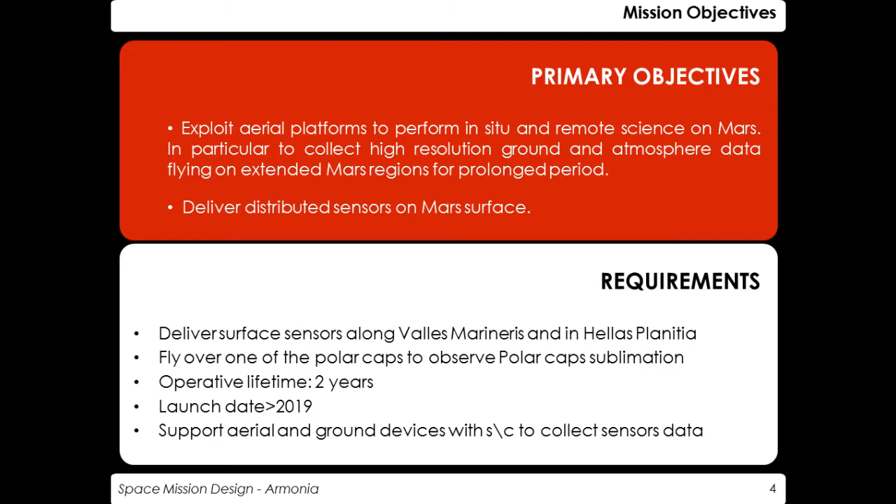Looking more in detail at the phenomena we are going to observe, we have divided them into two major regions. First, in the tropical region, we would like to observe the genesis of local dust storms, dust devils, and other phenomena like the sources of methane.

In the polar region, we would like to observe for sure the polar cap sublimation, and again the source of methane. In addition, we would like to remotely observe the residual magnetic field of Mars.

Our mission is mainly based on the use of 3 superpressure balloons as aerial segments. This is our choice: we decided to deliver 2 in the tropical region and 1 on the polar cap. This allows us to reach the 2-year operational lifetime, since the lifetime of a single balloon is not sufficient to cover the whole mission.

This is not done continuously, but at least they will cover the most relevant, scientifically significant periods on Mars. We will also rely on a dedicated entry vehicle, one for each balloon.

Thus, we can inflate the balloons directly in flight. This is the most promising technique for inflating balloons, and it will also allow us a sort of flexibility in the regional deployment of our balloons, and also in the time deployment of our balloons.

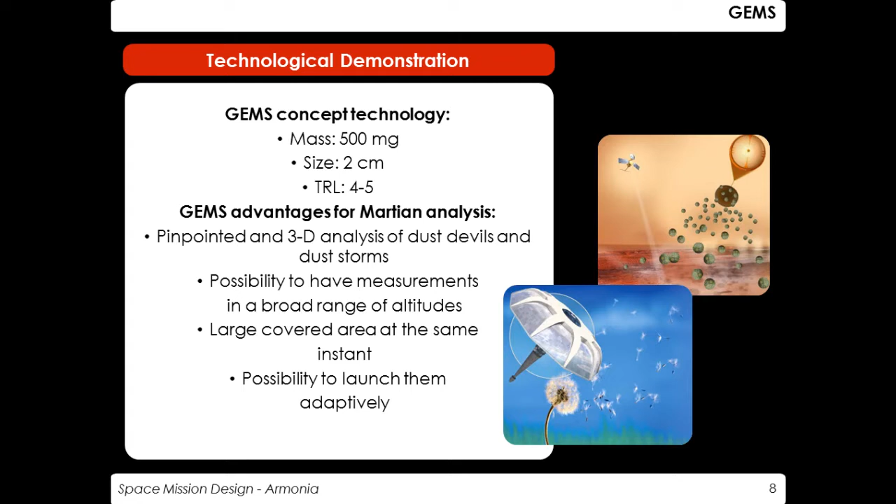They can be released by balloons in a peculiar period or during some relevant events. There are also representative models of the sensor.

Looking at the time scale of our mission, we will mainly have 3 phases. After the launch, we will have the transfer from Earth to Mars. Then we will have an aerobrake of about 150 days to save propellant and make the mission feasible. And then we will have the 2 years of operational lifetime ending with the disposal.

Having a look more in detail at the operational lifetime, we will first have a 1 month setup, during which we will observe Mars and try to set up everything, and maybe reschedule something or adapt the mission.

Then we will have the 18 months measurement campaign, during which the 3 balloons will be released according to what we have decided.

Finally, we will also have a buffer slot of 5 months for further measurements, or if the balloons survive longer than expected, we can keep collecting data, also from the ground station. We could also rely on releasing balloons in common periods to try to have simultaneous measurements.

What we selected was an aerobraking maneuver. We chose that because it's flight proven twice at Mars, it doesn't impact the interplanetary transfer too much, and it doesn't have strong requirements on the spacecraft configuration, but leads to large delta V savings.

We used a simplified model for the simulation, neglecting Mars rotation and assuming an exponential atmosphere model, and selected some parameters. The initial orbit is similar to the MRO mission, with the apocenter just inside the sphere of influence of Mars and the pericenter equal to the operational orbit we selected. During the aerobraking regime, we will have a pericenter of about 100 kilometers, chosen to minimize duration and have acceptable thermal and structural loads.

This is the result we get: a delta V saving of 1.2 kilometers per second, leading to a huge mass reduction. The possible issues were analyzed and solved, since almost 5 months to reach the operational orbit are okay within the mission timeline, and the thermal and structural loads were analyzed and found acceptable.

Here you can see the initial orbit in blue, and then every 50 orbits represented, as you can see the apocenter is decreasing until reaching the operational orbit, shown in green.

So we maximize for the communication windows, and these are the results we get using simple formulas and numerical simulation, assuming a minimum elevation angle for the communication of 10 degrees. We got a minimum communication window of 7.1 minutes per Martian day, and we have 100% coverage of the Mars surface in one day, so no blind spot for the aerial and ground segments.

This is just an example for one orbital period of coverage. For the entry vehicles, we selected a procedure to release them: we acquire a release orbit slightly lower than the operational orbit, we release the entry vehicle and related structure, as will be explained later, and then we return to the operational orbit.

For the trajectory of the entry vehicles themselves, our driver was again delta V minimization. We used a model for the orbital phase and the first order Allen model for the atmospheric phase. We had constraints on the velocity at which the supersonic parachute is released, and on the flight path angle, in order to minimize delta V and keep the entry vehicle inside the atmosphere. This is the parameter we selected, again through trade-off.

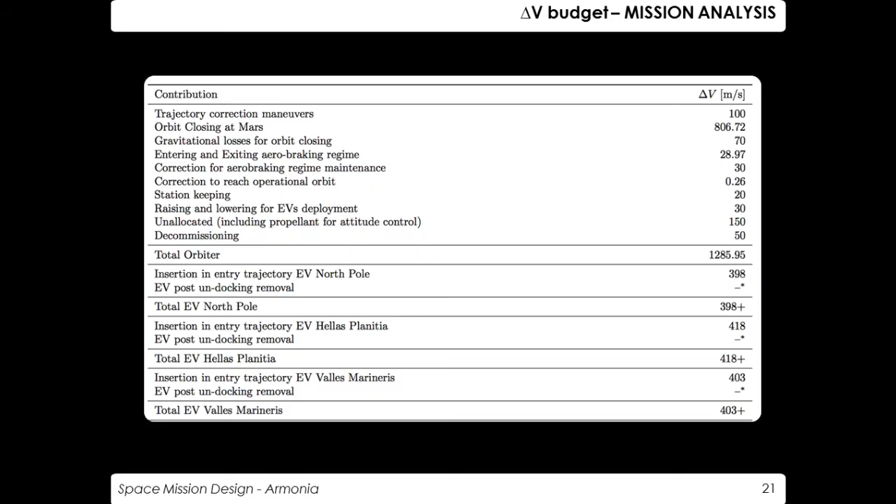I will now leave the stage to Claudio Pulsi, who will tell you all about the balloon design.

Thank you. I will try to explain the process that brought us to the design of the balloons that support the aerial platforms. First, an analysis phase during which we studied the environment of Mars, selected the technology for the balloons, and asked ourselves whether we wanted to rely on a guidance, navigation and control system on the platforms, and finally the strategy for the buoyancy of the balloon.

Then a sizing phase, during which we decided the dimensions of the balloons and chose the material for the envelope, and finally produced two numerical models as validation of our design: a thermodynamic model and a flight dynamic model.

First, for the environment, we used the Mars Climate Database from ESA as a tool. It receives as inputs space and time coordinates on the surface of Mars, and gives as outputs the main properties of the atmosphere, such as density, pressure, and so on.

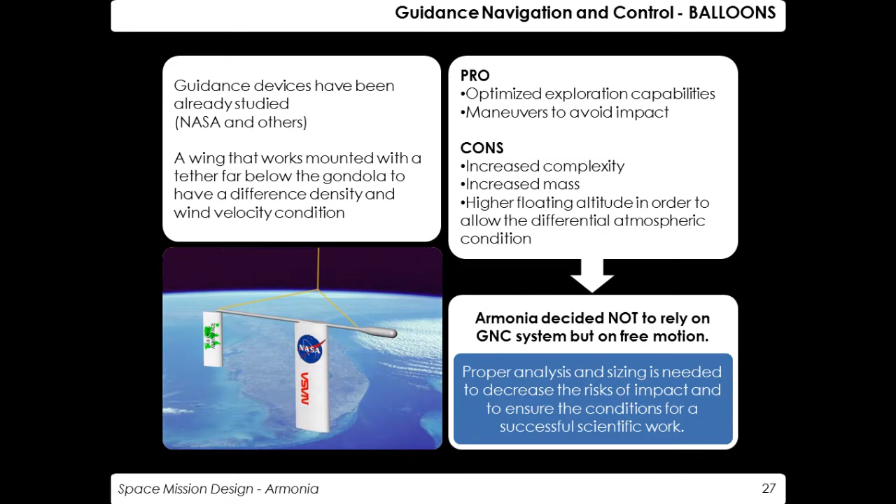As I said, the superpressure balloon flies at a constant density level, so we had to choose the density through some criteria. We created a model of isodensity surfaces in the atmosphere of Mars, and marked them with two performance indexes: the altitude experienced by the balloon, which has to be as low as possible to perform good quality measurements, but not too low in order to avoid impact on obstacles. So these are the two performance indexes.

For what concerns the balloon sizing, we followed static dimensioning through the Archimedes principle and exploited the two concepts on which superpressure balloon technology is based: superheat and superpressure. Superheat is the delta temperature across the envelope of the balloon, which must stay within assumed values, and superpressure is the delta pressure across the envelope, which must always be greater than zero. With those as inputs, we came out with the actual sizing dimension of the balloon.

For what concerns the material, we chose to rely on a composite envelope material in order to match all the requirements such as strength, stiffness, and in particular permeability of helium, because we wanted to increase the lifetime of the balloon, and UV resistance, which is a major concern in the atmosphere of Mars. So we selected a 3-layer composite material: low density polyethylene on the external side, fiber spectra in the middle, and mylar inside.

Two designs: one for the polar balloon and one for the two tropical balloons. The tropical balloons, as I said before, are bigger because they rely on a lower floating density.

In order to validate the assumption on superheat and superpressure, we made a thermodynamic model of the balloon, considering all the thermal sources, including internal reflection and transmission, and convection—natural inside the balloon and forced outside, considering the winds. We had to check that the superheat delta temperature was always under the upper limit, and the superpressure higher than a lower limit. We checked that the design actually could work.

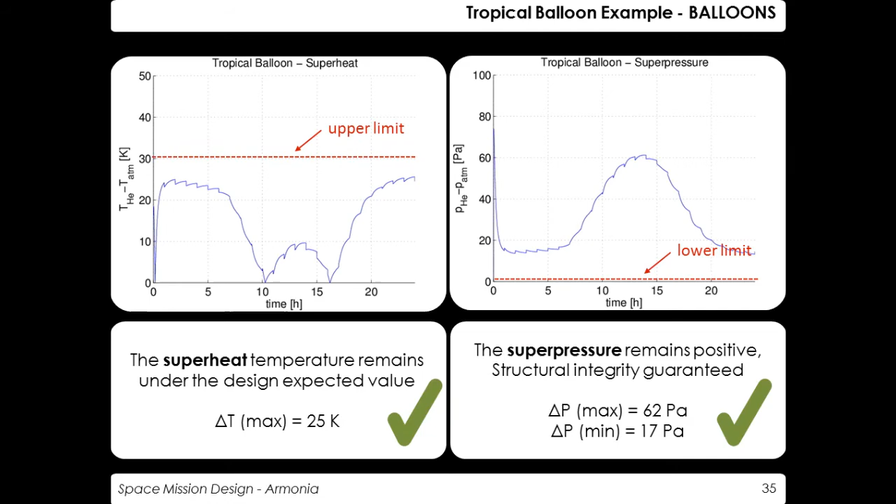As a last tool for validation, we made a solid dynamic model of the motion of the balloon, extracting from the Mars Climate Database a mesh for the atmosphere of Mars that provides, for many points on the surface and in the atmosphere over time, information on the characteristics of the atmosphere. We simulated the vertical motion and the horizontal motion in order to understand if the correct altitude was reached, and also if the guidance, navigation, and control issue was discarded for a good reason.

We also extracted from the simulation interesting results for the EPS subsystem, such as the sun elevation and simultaneous exposure of the balloons, for the thermal environment and thermal control system, and, as Amadeo said before, the ground track formation analysis. These are two examples of the motion of the balloon.

Here you can see the starting point in the red dots, and this is the first launch from Hellas Planitia. And this is the second launch on the North Pole. You can see the balloon descending.

We have decided to have a truncated pyramid shape with extendable body-mounted arrays. Going into detail of the configuration, we have an electronic box with a radiator on the bottom part, connected with its switches.

So here is a video where we can see the deployment of the solar arrays and the deployment of the boom, the boom of the wind sensor.

Going into detail of the subsystems, we start with the electrical power subsystem because it's the main driver for the configuration. We have decided to have a classical, reliable photovoltaic system with 4 extendable body-mounted panels, and for the secondary battery we have decided to use a lithium-ion battery.

We have also decided to have a sizing strategy for this subsystem, because fixing the area and knowing the irradiance during the day, we also know the available power for our system. So knowing the value required by each subsystem in each mode, we can try to fit the shape.

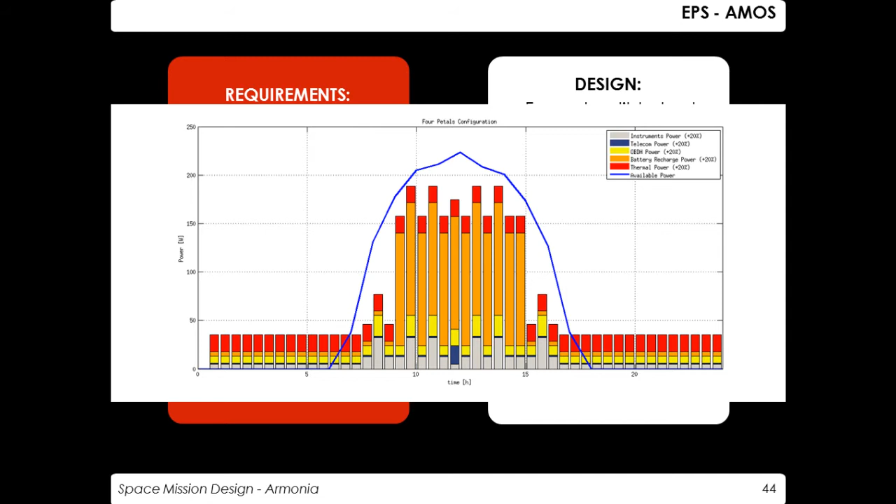Here we have science mode and telecom mode, which are the modes that require the most power. So we can always satisfy the requirements in terms of power with our available power.

So here we have the power budget and the mass budget of the system. We have decided to use a PCDU with direct energy transfer and a regulated bus, mainly because of the presence of the lithium-ion battery.

Then we have the thermal control system, which is driven by the low power available. We want mainly to remove heat from the hot equipment during daylight, but also to minimize heat losses during night. In order to do this, we have decided to have night thermal insulation and also a variable thermal conductive path.

Going into detail of the configuration, we have this electronic box connected to the radiator, as already said, with 4 paraffinic switches. This allows us to dissipate heat from the electronic box during daylight, but also to decouple the electronic box from the external environment during night.

We also have electrical heaters here and on the wind sensor in order to heat up the system, and also 5 thermistors.

With this kind of configuration, we can see how we can respect the temperature range for each element, both in the worst hot case and the worst cold case.

Here we have a mass budget and a power budget. We have decided not to use MLI because of dust and atmospheric issues, and we are focused on the study of the thermal conductive path because it's critical for a strong design of the thermal control system.

Then we have data. We have collected data and we have to manage data. So an OBDH system is needed.

Here the article of the telecom. So we made a study on the Martian atmosphere, focusing on the losses and the attenuation, mainly related to the fog, clouds, aerosol, and dust storms.

In this graph you can see how, in polar and Hellas region, the losses are almost equal depending on frequency. But in the southern hemisphere during the storm, the losses increase a lot.

We've also made an analysis on an equivalent noise temperature, considering an upward-looking antenna and a downward-looking antenna. With an upward-looking antenna, we can see how the equivalent noise temperature is lower, so we have decided to use this kind of configuration. Going into detail of the link budget, we have constraints on the power, the amount of data, and the visibility windows depending on the orbital motion.

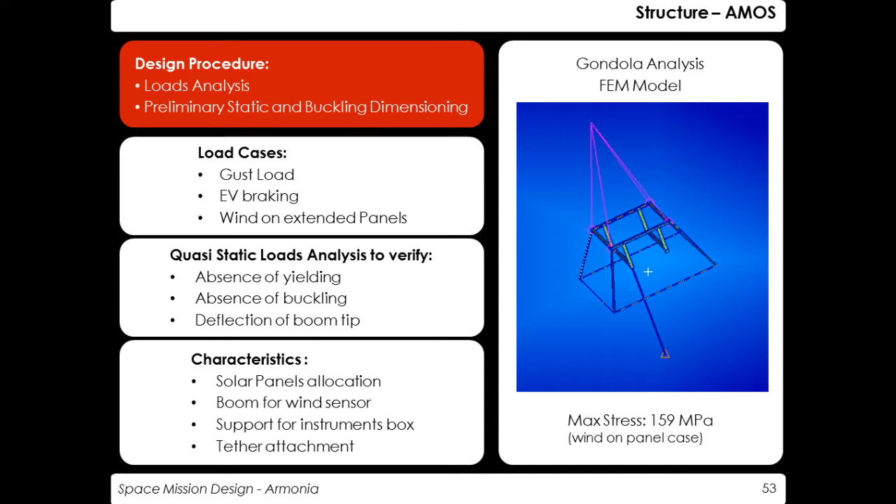Then we made the finite element model analysis in order to evaluate the loads and the response of the structure. Simulating our structure, we evaluated the loads, so gust loads, EV braking loads, and also the wind load on the extended panels during the storms. We have seen how no yielding, no buckling, and no deflection of the boom tip occurs during the storm.

So I will leave the stage to the last part and will explain the ground station of our mission.

Good morning everyone. I'll be talking about the ground station, also known as Moses. Starting with the configuration, we had two main drivers for the configuration that we selected.

The first one was that the ground station had to be small enough to fit inside the limited volume of the entry vehicle. And the second one being that the solar panels, which were used to power the instrument, should have been big enough to last the entire lifetime.

Based on that, what we decided on was the cylindrical disc configuration, which was 25 centimeters high and 87 centimeters in diameter. It was divided into two sections. First, the top half contained the 4 deployable solar panels, which would be deployed whenever needed. The second half was again divided into two sections.

One called the warm box. As you can see, it contains all your batteries, PCDU, amplifier, and the electronic equipment, while the second half contained all your instruments and the sensors needed for the mission.

As you can see in the demonstration, once the ground station touches the surface, first the solar panels are deployed. Secondly, we have a robotic arm which will be used to deploy the seismometer on the ground to avoid any sort of noise in the data. Then we have also considered using telescopic booms to deploy all the environment sensors so that there is no interference from the ground station to the readings.

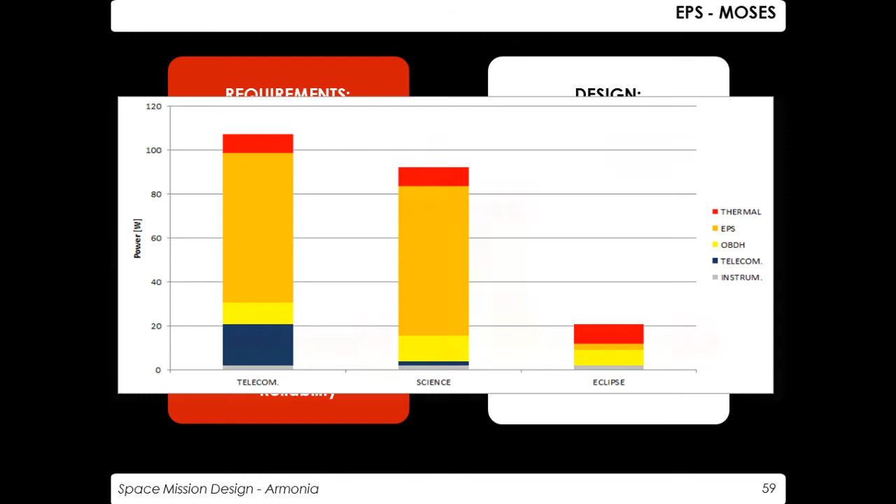Then to conclude with the EPS, I show you the mass and the power budget. We used a PCDU with a direct energy transfer with a regulated bus.

Then talking about the thermal control, here the main idea was the same as that of the aerial segment, to keep the components in their temperature ranges by minimizing heat loss while also radiating any extra additional heat that was generated. However, one important drawback, or limitation, for the ground station was its contact with the Mars surface.

During the night, that would have acted as a source of sink and depleted the ground station of all the heat. To overcome that and all the other problems, the strategy applied was use of aerogel all over the surface for insulation, then adding a radiator to the circumferential area of the warm box, which was controlled by 2 paraffin-based thermal switches.

Then to heat up the system, we had 1 electrical heating unit and 5 radioisotopic heating units. And to finally cover it all up, we wrapped it in golden coating.

Then to conclude the thermal control subsystem, I show you the mass and the power budget. I'd like to add one of the proposed technologies here was to use mini loop heat pipes to guarantee a uniform distribution of temperature, being a lightweight alternative.

Moving on to the onboard data handling. In this case, the main driving factor was the selection of the sensor suites that we had. Since we had mass limitations, we tried to find sensors which had built-in application-specific integrated circuits.

As a result, we decided to use a single electronics board that would contain a processor capable of delivering 25 megahertz. It was connected to the sensors using a 1553 data bus, and all the data was managed using our integrated remote terminal unit. Finally, we had a local data bus to connect the RTU with the processing units, and 16 GB of onboard storage to store all the scientific data.

Finally, to transmit all the data, we move on to the telecom subsystem. In this case, since we had no regulation on the bandwidth usage in the Mars environment, the main drivers came from the power available to the system, which was around 7 watts, and the losses specific to the Martian environment, as mentioned earlier.

Taking that into consideration, we took a signal to noise ratio of 8.6 dB, and we came up with a frequency of 400 megahertz, which was transmitted using a 0.7 meter long linear antenna and received by a 3 meter wide parabolic antenna on the orbiter.

Then we entered the most critical subphase of all, that is the inflation of a very huge subsonic drogue, as I say, the violet one. Here the system is composed of three main subsystems: the balloon here in red, actually here is inflated, the subsonic drogue, the violet, and a pre-parachute that is a cross-type parachute.

In the drogue, in the envelope, you can see these are scoops in which ram air can be taken in, in order to have a proper displacement working with the pre-parachute. And there are two main jobs that the subsonic drogue has to fulfill.

One, of course, is to slow down our system. As you can see, being it's really huge, it can slow down to 22 meters per second. And second, to prepare a protective environment for the inflation of the gas cell. This phase lasts for 120 seconds when inflation must occur, so very, very strict time. There is a maximum acceleration experienced of 9 Gs when the subsonic drogue is deployed.

Okay, sorry for that. So we can see that inflation is completed, as seen before, at about 9.5 kilometers in altitude. At this point, we need to release the subsonic drogue in order to provide the steady state flight for the balloon.

Then Moses deploys its parachute, that is a disc gap band type model as the one for the supersonic parachute for the entry vehicle. There is the detachment of the entry vehicle and relative structures that are still attached, I remember, at Moses. And then before touching the ground, Moses' airbags are inflated in order to have a correct impact.

These are main parameters for the parachute. As I say, these are disc gap band type. And these are the velocity profile for the descent, with an acceleration profile with a peak of less than 3.5 Earth Gs also here.

And this is the altitude. It's quite linear because steady state on the descent, as seen here in acceleration, is reached quite fast. And the overall descent lasts for 515 seconds until of course the impact.

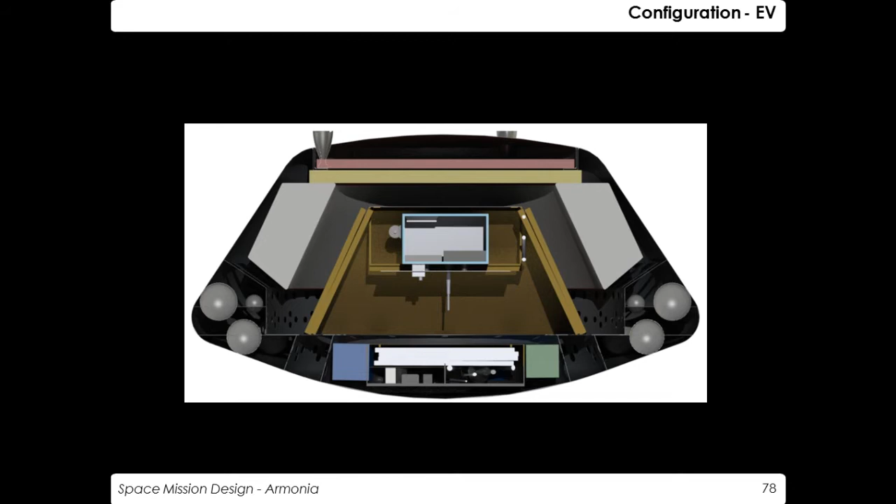This is the brother of the rendering behind me, beautiful Moses. And now let's talk a bit about the entry vehicle, the inside of the entry vehicle with its subsystems. We have 12 helium tanks dedicated for the inflation of the balloons.

These are radially and equally spaced displaced in the entry vehicle, as you can see. There is the propulsion subsystem pressurizing and feeding system here: 2 tanks for the monomethyl hydrazine and 2 tanks for the nitrogen tetroxide, with 2 tanks of helium for the pressurizing system. There is Moses, our ground station.

So what we have done to validate our shell of the entry vehicle, we performed a CFD analysis to validate also our models for the descent, using a computational fluid dynamic analysis with CO2 flow. Actually, Mars atmosphere is 97% CO2.

We obtained a drag coefficient of 1.45, which in the literature is quite accurate since values are usually between 1.4 and 1.5. We have a heat flux of up to 5 watts per centimeter squared. You can see the Mach number and the maximum temperature reached for the fluids, that is, of course, in front of the heat shield.

What we have done instead with respect to the structural analysis, through a finite element model, we designed an aluminum alloy shell, taking into account the gravitational acceleration and the pressure that has to be sustained during the descent. Due to the very thin atmosphere on Mars, we have a peak dynamic pressure of 3,500 pascals onto the heat shield during descent, with an acceleration inside for the various masses of 17 Gs.

So the numbers were really small, but stresses here are very, very far from the aluminum yield stress value. We are about 9 megapascals of maximum stress onto our structure. And in order to have an even more conservative design, we modeled the external shell to sustain all the loads without considering any internal reinforcements. So with internal reinforcement, the situation is even better.

Talking now about the attitude control system, we have as a requirement for precision landing to have no lift component of the aerodynamic force, and we provide this with a PID and pulse width pulse frequency modulation controlling our secondary thrusters. Our main goal is a pointing error, with respect to velocity vector of the vertical axis of our entry vehicle, of less than 1 degree.

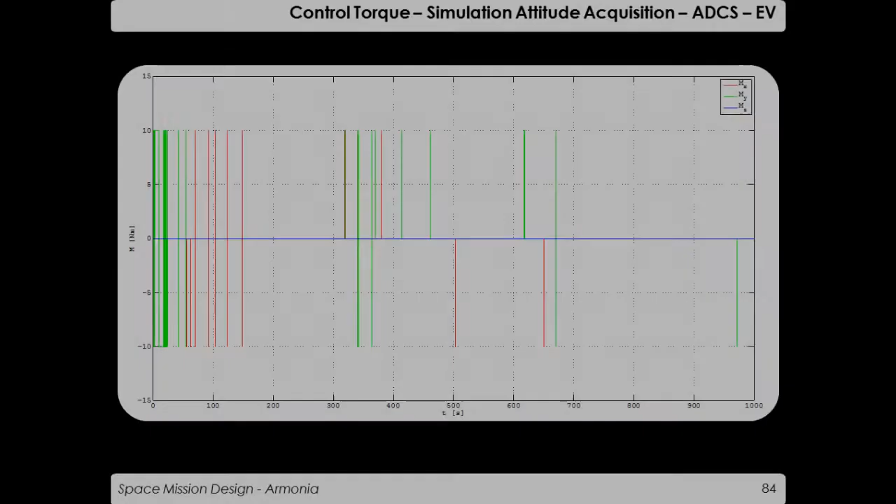Then we talk about the propulsion subsystem that has to perform the orbiting kick and the attitude control, as already said. As you can see, Delta V has been tailored by Amedeo, mission analyst, for every entry vehicle in order to save mass, because our main driver is always mass saving due to the huge components we have on our mission.

As you can see, there are 3 main engines, numbered 1, 2, and 3, in red, radially disposed, provided by Aerojet, in the class of 110 Newtons, paired with a secondary subsystem numbered 1 to 4 in purple here in the sketch from EADS Astrium, that's our 10 Newton class for attitude control. The overall system is a bipropellant system, as you saw: monomethylhydrazine and nitrogen tetroxide.

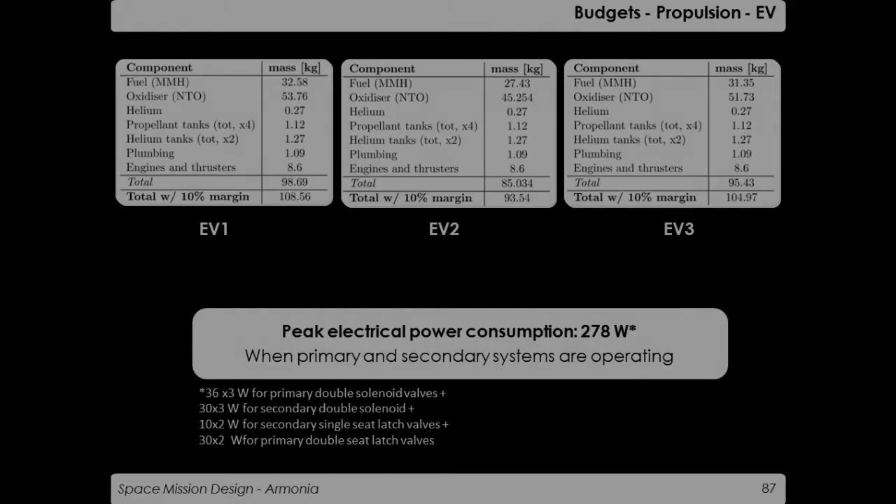When we dealt with the configuration of our orbiter, the main concern was the position of the 3 entry vehicles that are quite massive, and therefore will be deployed over a long time. We tried to maintain the spacecraft as balanced as possible, because our simulations showed the attitude control system would be too big to control an unbalanced configuration with another position of the entry vehicles. So we decided to align the entry vehicles with one axis of the spacecraft, the nadir pointing axis, to enhance the gravity gradient stabilization of the attitude.

We fixed the panels orthogonal to the nadir axis to allow rotation around the nadir axis, maintaining the solar panel as close to orthogonal to the sun as possible, without needing 2 hinges with 2-axis control. The nadir Mars antenna's orientation is controlled by the attitude control system. To fit inside the launcher, we needed a foldable solar array and retractable antennas.

Moreover, concerning the structures, that was another main problem for the orbiter - we cannot attach anything to the heat shield of the entry vehicles. This configuration has a major drawback of complicating the mission if one entry vehicle's deployment fails.

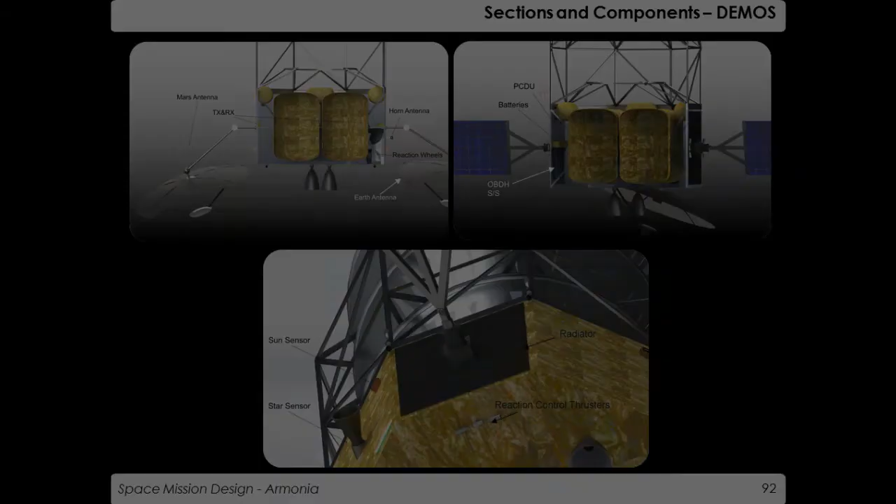This is the operation around Mars with the Mars pointing antenna and the two-axis controlled Earth antenna - those are the only instrumentation carried by the orbiter.

The orbiter is mainly a deployer of entry vehicles, but we fit into this phase the installation of 2 cameras and 1 spectrometer to perform analysis on Mars anyway.

But this is the final configuration that we obtain when everything is deployed. The attitude dynamics control system mainly drives the configuration of this orbiter, as I just said.

We have a nadir pointing mission basically, and the Earth antenna does not impose any requirements on the attitude dynamics control system. We only require the nadir pointing mission with a nadir pointing error of less than 1 degree, and a rotation around the nadir axis to maintain the solar panel orthogonal to the sun within 5 degrees.

We need maneuverability for the deployment because we have to reorient all the main engines to perform the safe maneuver. We need to be stiff during the aerobraking and firing modes, mainly during the aerobraking with the huge, big panels that we have.

The reaction wheels have to perform this work in order to carry out the previous maneuver.

The second main concern about the orbiter is the structural part, because we have to provide an external support for the three entry vehicles without attaching anything to the heat shield. The design case is the inertial loads present during launch, but with these huge masses attached to such a thin structure, we have a lot of problems meeting the frequency requirement of the launcher.

We performed the analysis and satisfied the requirements: we carried out the static and buckling dimensioning, and then the modal analysis to avoid resonance with the launcher vibrations. So those are the constraints - attached to the back shell, minimum frequency - and we concluded with an aluminum strut structure with aluminum panels reinforced with bars.

Those are the inputs, the flight envelope of the launcher, the Delta 4 Heavy. We made a finite element method analysis to perform this computation, and we also checked that the aerobraking loads are withstood by the solar panels with this solar panel substrate.

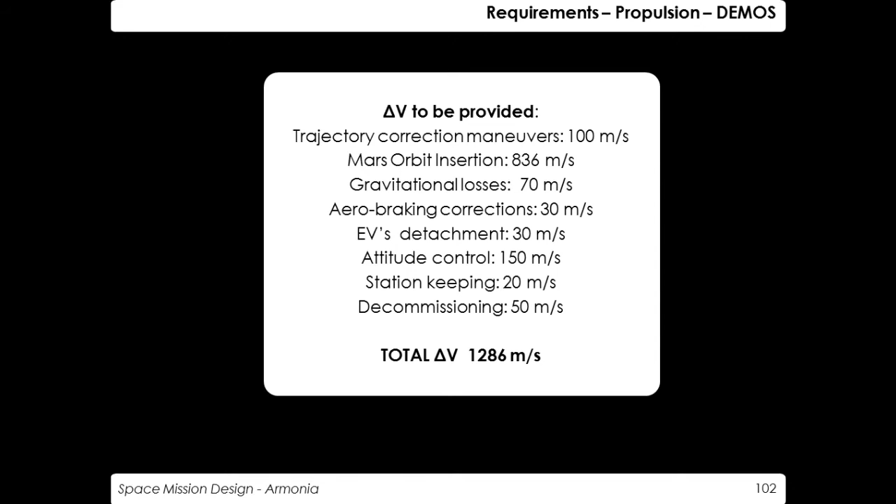According to the mission analysis, we have the Delta V to be provided by our main propulsion system, mainly after the launcher injection into Mars transfer orbit. It is only in charge of our main propulsion unit with 1.2 thousand meters per second of Delta V provided.

The main engines are placed very close to the center of mass to avoid attitude disturbance in case of failure. There are 6 pairs of secondary thrusters to perform all the control maneuvers, and the class of 890 Newton MMH NTO primary propulsion system, and MMH NTO 22 Newton thrusters for the secondary propulsion system.

This is the sketch of the propulsion system with the two main engines. It's pressure regulated and basically contains all the stuff that we need to make the system work.

The mass budget is obviously the most relevant for the whole mission, because it's 1.7 tons of mass for this system, mostly for the propellant, and peak power consumption of 140 watts to operate all the valves and the pressure regulation system.

For what concerns the thermal control system, we have a narrow temperature range to satisfy, and mainly we have to face different configurations after the entry vehicles are deployed. For this reason, we implemented a thermal control system that has to be stiff to external variation across the different phases of the mission, regulated from global insulation to localized dissipation.

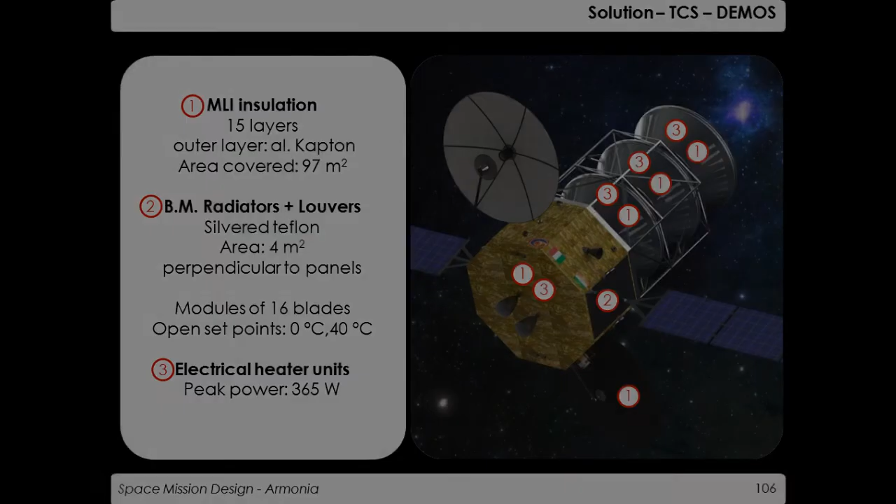So as I said, the cold case is during transfer for sun pointing attitude, while the hot case is when Mars is at perihelion and our orbit is without eclipses because of the right ascension of the ascending node.

But anyway, we are within the ranges of the instrument, because obviously this is the transfer with the coldest body temperature, and the panels have the highest body temperature because they are continuously pointed to the sun.

While around Mars we have the situation with 3, 2, 1 and 0 entry vehicles. Obviously with the first entry vehicle we are always well below the required limits. In this situation the entry vehicles protect somehow the body of the orbiter from dissipation.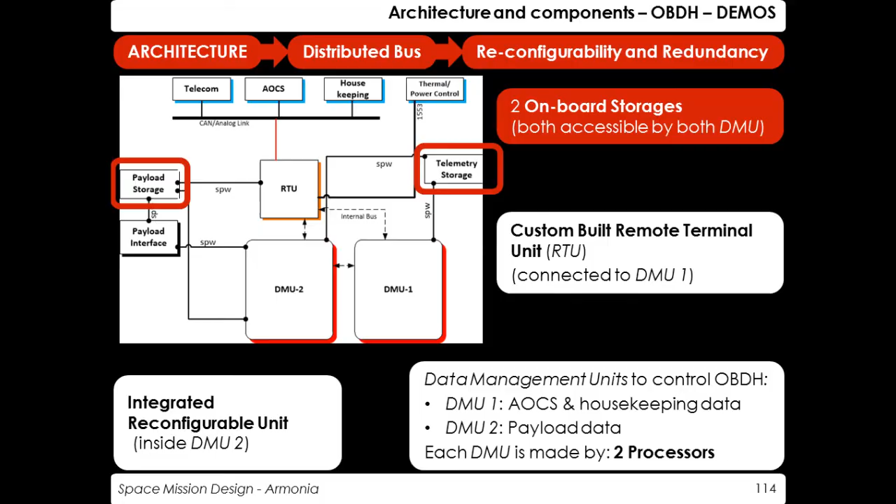And then we have the 2 memories to store all the data. Here are some components that have been selected and the tracking software we selected to use.

All the data collected on the orbiter comes not only from the orbiter itself, but also from the other segments, since the orbiter acts as a relay between the segments and Earth.

So with the constraint of this quite huge amount of data to be transmitted, and the constraints on the power supplied to the telecom system, and in order to grant the desired signal to noise ratio, we perform a link budget, selecting as the downlink frequency 32 GHz.

With a 3-meter diameter parabolic antenna and the deep space network as a receiver, what we get is that this is the total amount of data we can transmit in blue, and in red, the total amount of data that we should have to transmit, obtained taking into account again a constraint that comes from mission analysis, that is the number of visibility windows and the duration of each one.

But as we can see, we are able to transmit all the data we have within the visibility windows we have. And at the end, I want to present you the EPS, since all the subsystems we have seen until now require power.

And as drivers for this, we use the specific power and the reliability.

The key design drivers are specific power, in order to not increase the mass too much, and reliability, in order to not increase the risks, since the mission is quite risky by itself. The design relies on 2 solar arrays and a secondary battery. Since the propulsion system requires it, the power subsystem must support the power demand for both average and peak loads, for each mode and each phase.

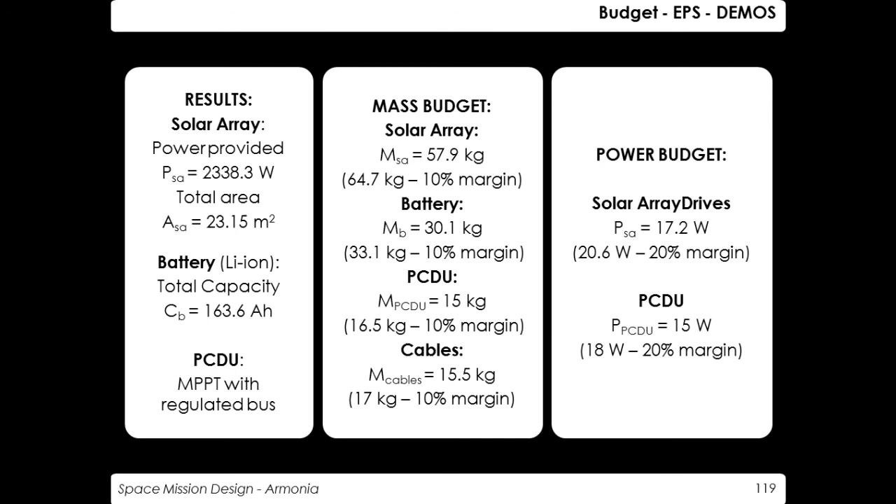This is the budget we did, with a solar array area of 23 square meters, and the selection of secondary batteries, which are lithium ion. Since they are very sensitive to charge and discharge, we selected a PCDU with a regulated bus.

At the end, we did an additional analysis with a COMSOL model to simulate the aerobraking, since the drag increases the heating of surfaces. The condition we selected has the rear face of the panels oriented in the direction of motion during the aerobraking. As we can see here, this is the simulation.

Here is the area where the cells are placed, and this is the substrate. As we can see, the temperature is lower where the cells are placed, and it never goes above, it's always under 150 degrees. For this reason, we decided to put all the wirings and connectors on the front face of the solar panel, and each material and process for the array must be investigated for its ability to survive at these temperatures for multiple exposures.

Now there is a mass and power budget, since both have been done for the overall project. Some drivers we have to take into account, since this is for both AMOS and the tropical and polar balloons. As you can see, they have quite a huge mass.

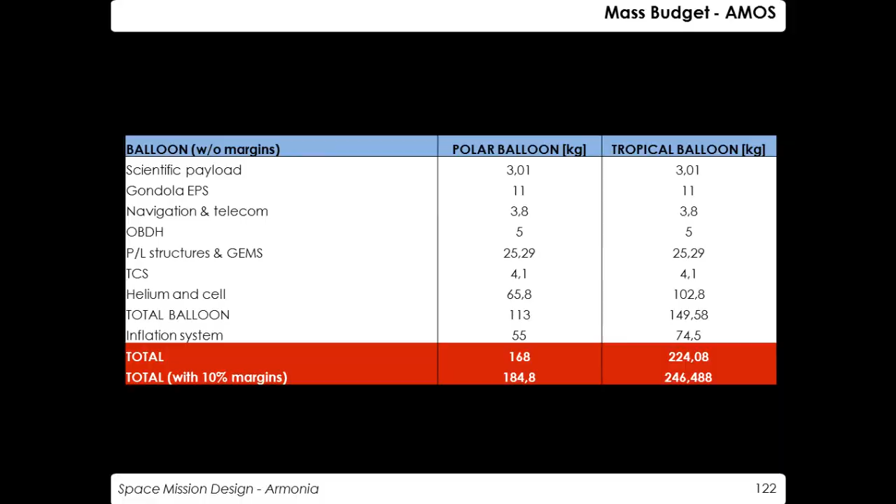Now, to draw some conclusions, as we can see here, these are the most critical aspects of the project we have talked about until now. The most critical aspect is the in-flight inflation of the balloons, since it has a low TRL. This means we have to reduce this risk index, and this should be done with a test campaign in an environment similar to the one we could find on Mars. The others are additional risks we can have in our mission, but with a lower index.

Considering all these critical points, not only the low TRL of the inflation technology, but also the lifetime of the aerial platforms and the low number of ground stations, since we have a requirement of 4 but are only able to have 2, we can say that the mission is feasible because all required scientific data are collected.

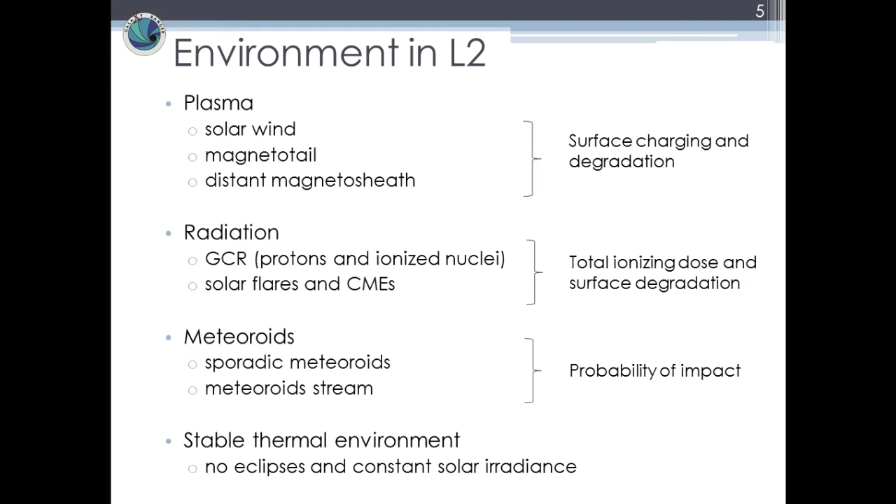From a pool of different configurations, we decided on a single launch and a monolithic rigid structure. The phases are the traditional ones: pre-launch, launch, commissioning, transfer to reach L2, operative life, and then decommissioning. Notice we have a safe mode to handle any problems encountered, and considering the operative life phase, 80% of the time can be dedicated to observation, so dedicated to science.

Now I'll leave the word to Arianna, and we can start with configuration.

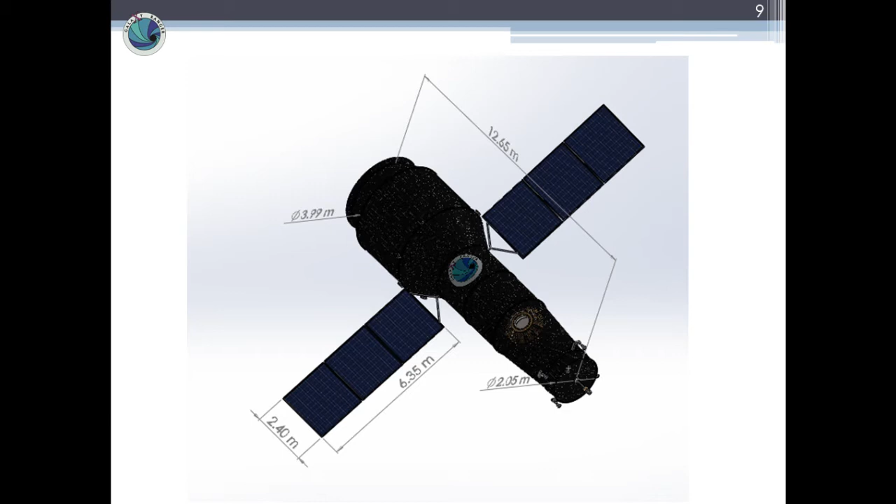Good morning. So this is the Galaxy Ranger. Here you can see some dimensions. The length, of course, has to be higher than 12 meters, but actually we only added a small room here for the sensors, while the diameter goes from almost 4 meters to 2 meters, because the main bus is around the tube of the telescope.

Here you can see how it will be inside the fairing of the Ariane 5, which we chose because it has the most stringent dimensions. You can see that the panels will be folded in 3 pieces and then fixed along the main body. You can also see that part of the telescope goes inside the adapter of the ATV, which is the one we chose.

Now let's have a look at what is inside. Inside the main bus, you can see there is a plate with tanks for both pressurizing gas and fuel, and on the other side, all the electronic devices.

Then there is a ring at which are attached 4 reaction wheels. The 5th one is inside the tip. Around the tip there are the thrusters for the transfer, around and not on it, so as not to cover the visibility of the 2 antennas.

We also have a 3rd antenna that is a phased array. As will be better explained later by our TCS expert, we managed to have one side always in light, while the other is always in shadow. This is why the antenna is on the sun side, while the radiators that you can see here...

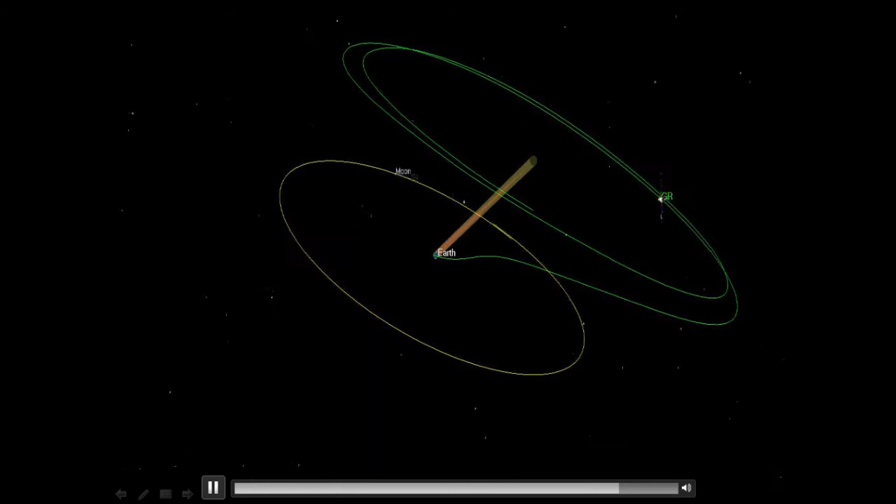Now I'm going to talk about the constraints I mentioned before. The launcher is a critical point for our mission, not only because we want to do the insertion maneuver with the upper stage, but also because of the minimum bending frequency and the fairing volume. As you could see before, we have a 12 by 3 meter telescope, so we must be sure it fits in our launcher.

So you will see later that we are under this value, and as we prefer to be launched with a European launcher, we selected the Ariane 5, but we have Delta 4 as a backup just in case.

For the launch date, the constraint to choose the launch date comes from the year, which of course can be performed before 2025, the relative inclination between the equator and the reference orbit I was talking about before, and the minimum interaction with the moon.

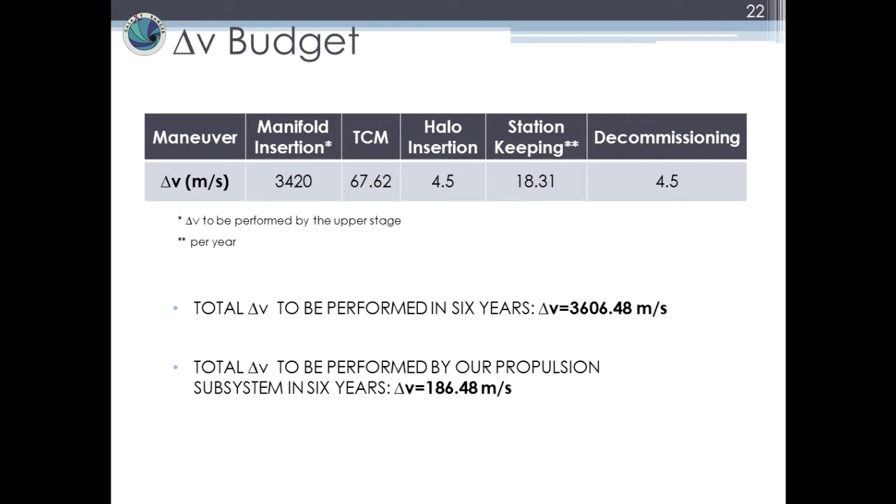Here you can see the final delta V budget with all the delta V for every maneuver, including the manifold insertion performed by the upper stage. We have computed that for the 6 years, the total amount of delta V is 3.6 kilometers per second, and the total amount to be performed by our propulsion system is around 200 meters per second, since the rest is done by the upper stage.

And then I will give the word to attitude and control.

The attitude determination and control subsystem is quite vital for a mission like ours because we have very stringent requirements coming directly from the payload.

We need to be able to look at any point of the hemisphere that doesn't contain the sun at that moment, and we need to do that in less than 4 hours, so to perform any rotation in less than 4 hours.

This led us to choose reaction wheels as actuators because they can store angular momentum without using propellants, and we have to choose them with quite high torque. We need 5 of them: 1 per axis and 2 for redundancy.

We then also have high requirements regarding the pointing accuracy. We need to be below 1 arc minute for the absolute pointing error, that is the difference between the actual position and the intended one.

We need a very high accuracy on the absolute measurement angle, which has to be less than the resolution of the telescope. And we need a relative drift over the acquisition time that has to be less than half of the resolution of the telescope, so as not to have 2 pixels blend into one another.

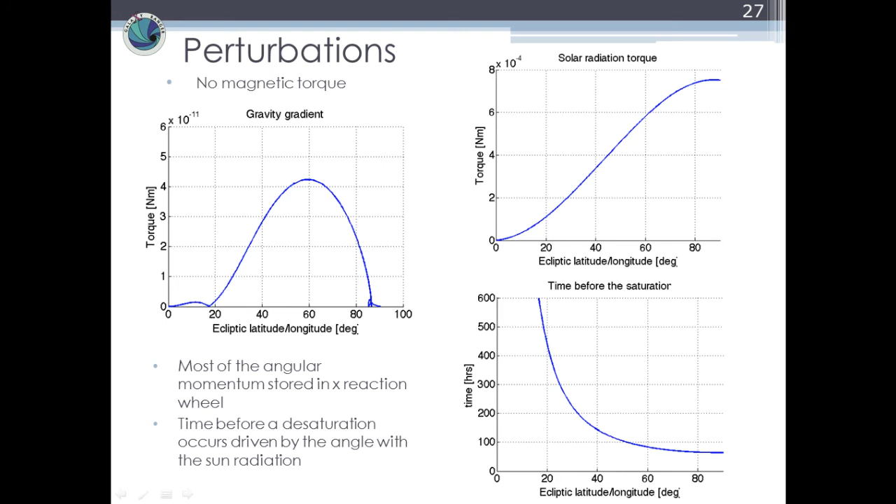So the desaturations happen with external thrusters, the same ones we use for station keeping. And since they are the same, we apply quite a high torque. We are talking about 40 Newton meters, and the engines of the reaction wheels give millinewton meters.

So it means that we have just 4 shots, very short shots of the engines in 300 seconds, and we can desaturate continuously. We have 2 wheels, so these 4 shots have to desaturate them both at the same time.

But during the desaturation, the absolute pointing error, which is the difference from the actual position and the intended one, is going to change a bit, and it's going to exceed the requirements for the observation. So we need to decouple the desaturation mode and the observation mode. We also see that it takes quite a while before we can dampen this oscillation, so we have 300 seconds for desaturation and much more for bringing the telescope ready to fire again.

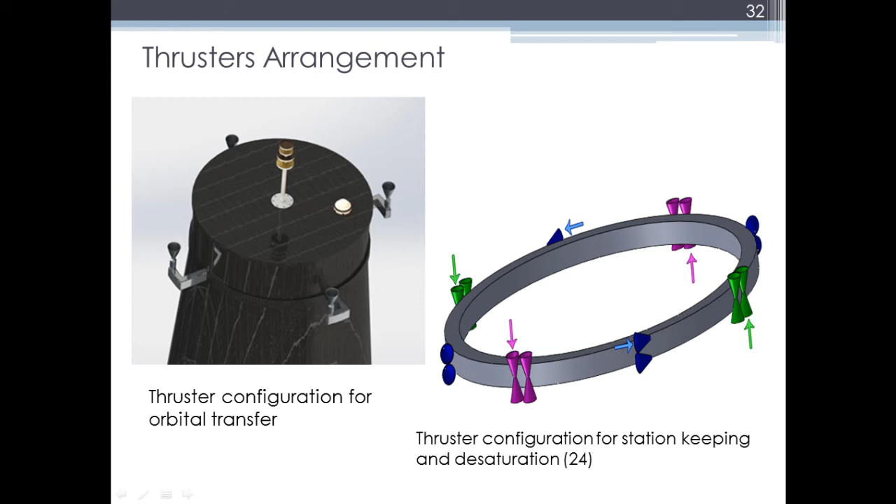For desaturation, the arrows that you see, one going down and one going up, show how we're going to apply the torque. But when we are using it for station keeping, it's simple, we're going to use them in the same direction. On the other slide, you can see the thrusters we are using.

And I give the word to Julio to continue the presentation.

Good morning everybody, I'm Julio Triberti, and I will introduce you to the telecommunication subsystem of Galaxy Range.

So the goals of our mission are, for sure, to set up a high data rate connection from L2 to deliver the scientific data, and an extended TT&C link to monitor our spacecraft. These two tasks are a bit more difficult than this because we also have a highly variable attitude that makes this task stronger. So now, the identification of the requirements.

Since in the ADCS we knew that our telescope has a particular attitude, the constraints on the field of view of our antennas are hemispherical for what concerns the TT&C, and for what concerns the high data rate connection, we have to have a field of view that stays in a quadrant. So from the original 10 gigabits per day data rate, due to the encoding scheme selected, we have to double the data rate to downlink.

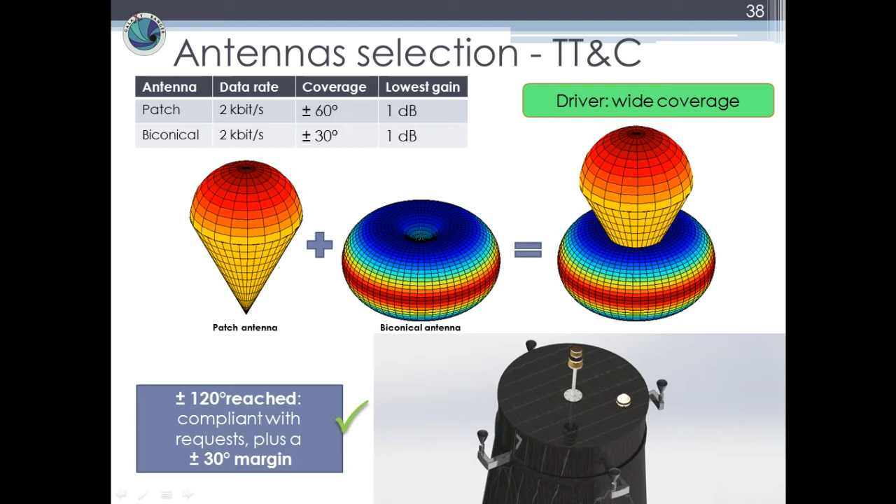So we can skip to the high gain antenna. For what concerns the high gain antenna, we would like to deal with a really variable attitude. This is why we prefer the phased array antenna instead of a steerable dish. In fact, if the mechanism had failed, we wouldn't have been able to transmit in the overall hemisphere, but just in some restricted regions.

Ending, there are the effects of the telecommunication subsystem on the other subsystems. The mission analysis was asked to keep the sun at almost 2 or 3 degrees away from the Earth. The OBDH sizing of the memory was given by the visibility. The same is for the sizing of the batteries, and the ADCS had to make one side of the telescope always looking towards the Earth.

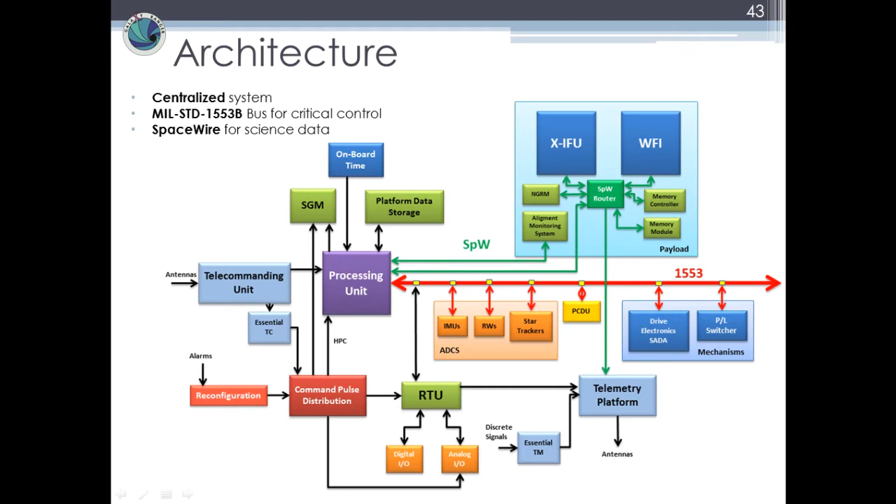For the high reliability systems, such as the attitude control system, the electronic mechanisms, and the power distribution unit, we use a 1553 bus, which is deterministic and has been proven for more than 30 years.

With respect to housekeeping and attitude data collection, we have considered the 4 main kinds of discrete signals in the ECSS standards: the analog signal monitor, coded with 12 bits; the temperature signal monitor with around 16 bits due to the high accuracy needed in temperature measurements; bi-level discrete signals; and bi-level switch monitors. We also have a lot of different digital connections that I won't go through.

In total, we have around more than 2,000 channels of collection, keeping almost everything in full redundancy, and a data rate generated of around 17 kilobits per second. This data rate is really high, but we need it to control and monitor the spacecraft.

We transfer it through the high gain antennas, but we also need omnidirectional communication, so we create an essential telemetry channel, reducing the acquisition of the data to around 30 seconds to 1 minute, giving a total of 700 bits per second. So the power consumption of the antennas will be lower.

In the processing and software, we have performed a bottom-up estimation. We consider the applications that best suit our needs, and we have come up with a throughput and software memory considering a 400% margin, as recommended at the preliminary design review. We have around 1 million instructions per second and around 12 megabits of memory, which already includes the operating system, or executive, for which we selected RTEMS, because it's the recommendation of the European providers for the processors.

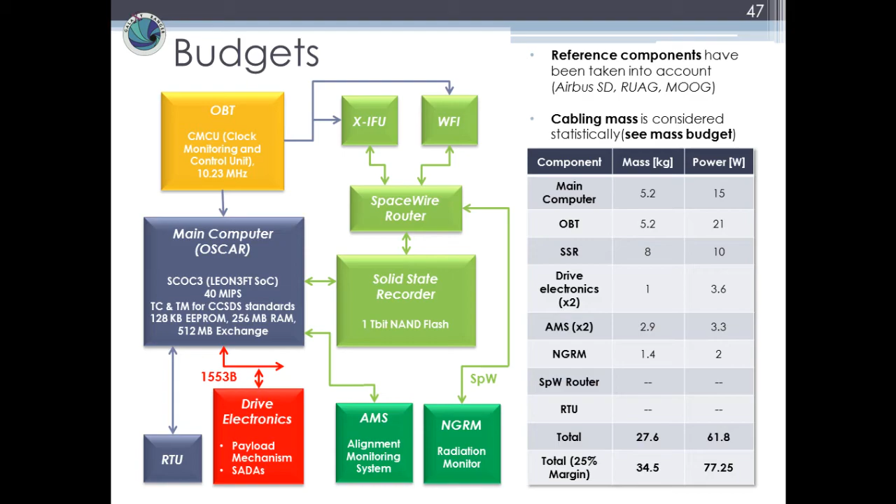Who's in charge of the thermal control subsystem? The main task is, of course, to keep the components in their temperature ranges. But then, due to the peculiarity of our mission, we also need to maintain precise geometry and alignment between the telescope, the sensor, and the optics.

So the drivers of the design were the minimization of temperature gradient for the structure. Therefore, the design philosophy is based on insulating the whole structure from external sources and internal heat sources. We can notice here the sensor housing, here the optics, and all the components in the main bus. So the idea is to avoid thermal gradients due to heat generation.

Considering the insulation from the environment, we decided to use MLI insulation. This is because we have a very high area irradiated, and without MLI insulation the heat flux would be too high for the structure. As you can see, the outer cover chosen is black Kapton. Why black Kapton? Because of the stability of thermo-optical properties, which is necessary since we need constant absorptivity during the whole lifetime. Black Kapton is also useful because of its electrical conductivity, allowing us to avoid electrostatic discharge. The inner layers used are PoliMI plus polyester foams.

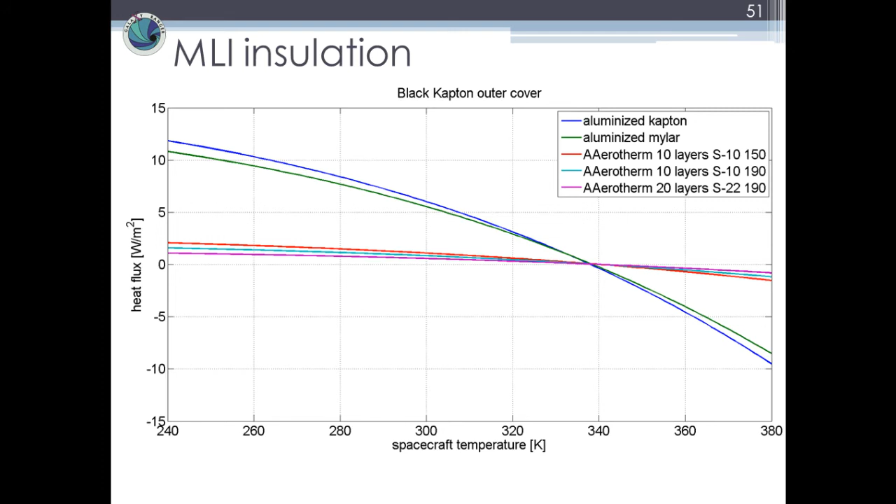We considered, for the thermostructural calculation, a heat flux coming from the MLI, passing through the insulation, of 2 watts per square meter. This value is the highest one, done in order to have a robust design. So considering the worst exposure case, when half of the telescope is irradiated by the sun, and a heat flux through MLI of 2 watts per square meter, we obtain this picture of thermal gradients. The gradients are very, very small, and we can guarantee a maximum longitudinal displacement of 0.43 millimeters. Lateral displacement of the structure is negligible because the lateral thermal gradients are very small.

Now, considering the main bus and the sensor housing: as said before, there is heat generation due to components when they are active, and we need to maintain them in their operational temperature range. A pure passive control can be adopted, using two dedicated radiators, one from the main bus and one from the sensor housing. The radiators are never exposed to the sun thanks to the attitude, and the hot and cold cases are regulated passively through heat switches.

In particular, we can notice the internal generation in the worst cold and worst hot cases for the main bus and for the sensor housing.

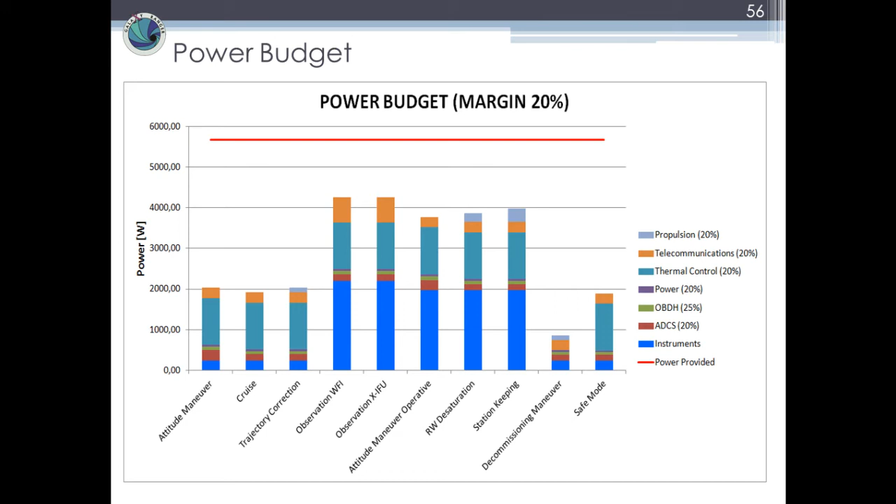Now, the main constraint is the fact that we have to look basically everywhere in the sky, which means we must provide enough power for the observation peaks no matter the orientation of the telescope in space. We considered mainly two kinds of solutions: one with fixed solar arrays, and the other with solar arrays using mechanisms.

We realized pretty soon that having solar arrays with a mechanism has a lot of benefits. For example, we can use smaller panels, and we can always provide power no matter what the incidence angle with the incoming radiation is. The only drawback is that we have a rotating mechanism, so we have something that may fail. But we actually took that into account, as we will see later.

So we went for solar arrays with a drive mechanism, and we tried to go with a high TRL one because it's a very important component. We completely neglected the possibility of an RTG because having a European launcher for sure doesn't allow for nuclear sources. Now this is the sizing of the solar arrays.

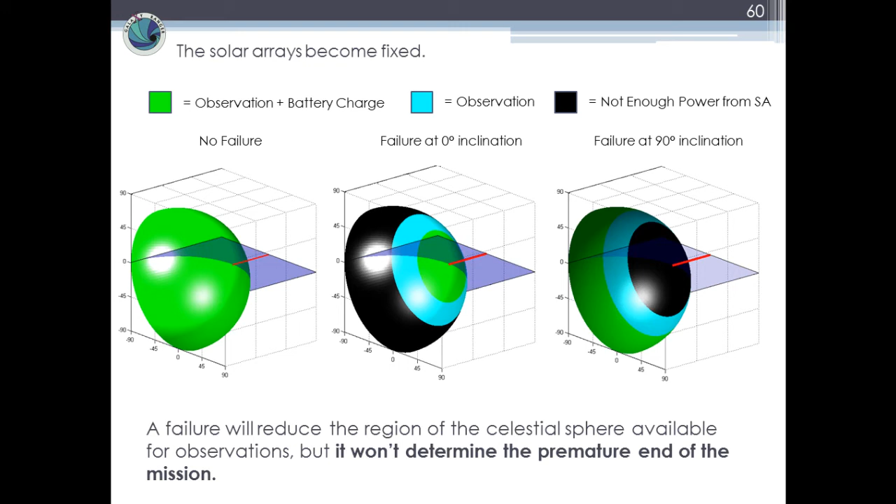And then we move on to the batteries. As mentioned before, for us the battery sizing is a little peculiar because we will always have solar arrays in light, so we will always exploit them for power generation. But it might happen that for some failures, we may be forced to go into safe mode without the batteries, or without the solar arrays providing power. That's the reason why we decided to size the batteries for safe mode, just to add a little redundancy and make sure our spacecraft doesn't die if the solar arrays are not working.

With that in mind, we had a total battery capacity of around 9,000 watt-hours, with a mass of 57 kilograms, and their configuration is 19 cells in series and 24 strings in parallel. We also checked that we can use those batteries for the deployment phase, which is at the beginning of the mission where we have to unfold the solar arrays.

From the sizing, we got that the amount of capacity we have is enough to guarantee also the deployment phase. Finally, this is a rough configuration for the EPS subsystem.

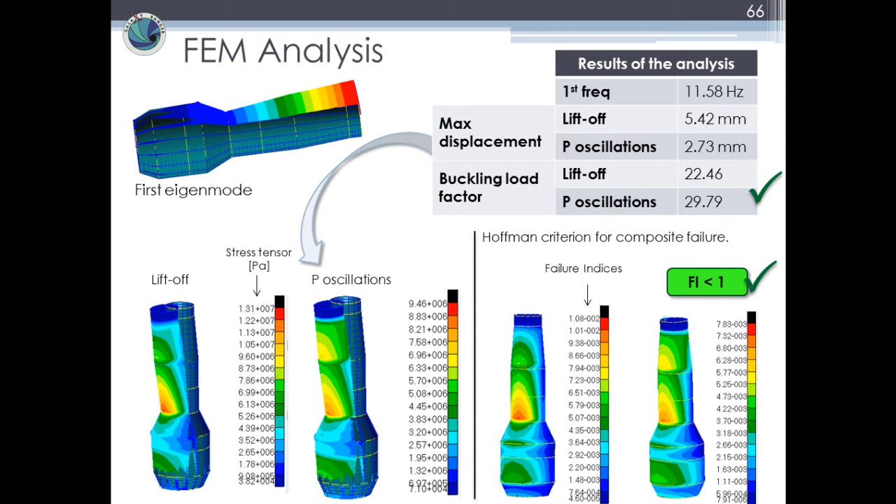For the sizing of the solar arrays, we decided to use these layers. The ones tested are only the structural ones: the face sheet in carbon fiber, the honeycomb in aluminum, and the face sheet in carbon fiber on the other side.

As said before, we decided to divide them 3 times, for a total mass of 65 kilograms and a first frequency of 11.58 Hz. From the modal analysis, we saw that some frequencies fall into the range of the acoustic frequencies coming from the Ariane, which are the center frequencies of the acoustic loads.

Therefore, we need to test this structure and the way it is attached to the spacecraft to be sure it will not get damaged during the launch.

Going back to the system level, this is the mass budget, the final mass budget. We have the payload, which takes into account both optics and sensors, and the propellant, as said before, with a 15% margin.

And this is the table of the dry mass with all the margins. We have higher margins for the telecommunication and the OBDH. The telecommunication because there could be changes in the antennas we want to use, and for the OBDH to take into account also all the cables in our component. So this is the total dry mass margin.

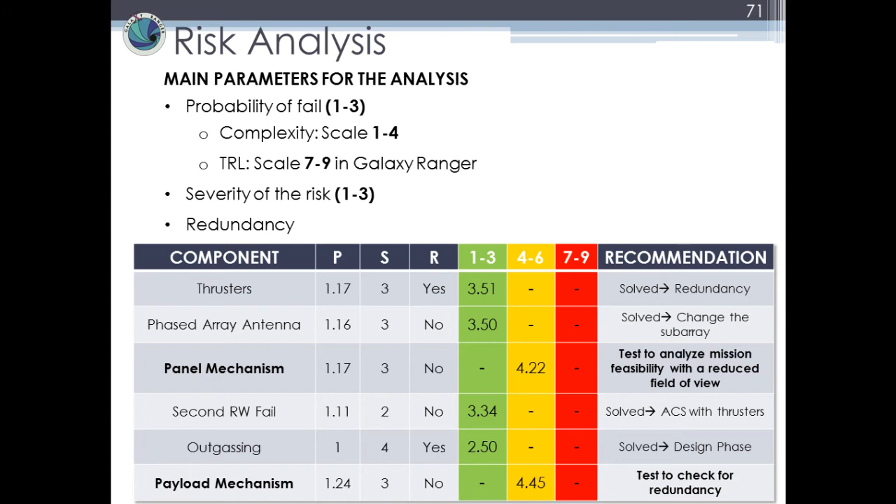For the payload mechanism, which is the mechanism that moves from one sensor to the other, the risk is also above 4, but we recommend performing a test to check for redundancy in the mechanism, because we have also computed what the cost and risk will be with the redundancy, and it will go below 4, so it will also not be that high.

And then I'm going to leave the word for the conclusion. Thank you. Good morning again. Just a summary of the results of our study: the mission is feasible because all components have high TRL, and also the cost is reasonable.

Weak points are related to the mechanisms, in particular the solar array deployment mechanism for the reasons explained in this presentation, and also the payload mechanism, that is, the possibility to change the payload. Also note that the weak point could be the phased array, because a dedicated design must be done in the future.

Possible tests and suggestions are, of course, the thermostructural test, because, as explained, maintaining the alignment between the optics and the sensor is fundamental for the mission. Then, tests must also be done for the acoustic loads, as explained by Cyril in his paper.

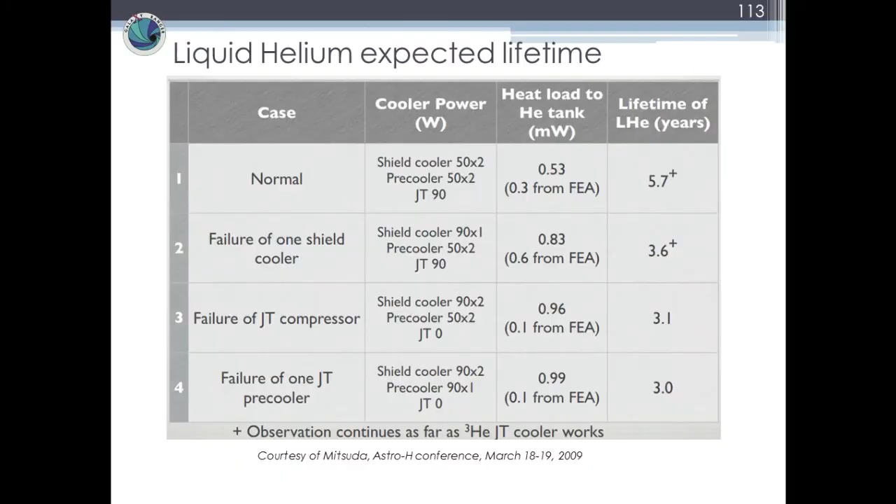Yes, I didn't see if in the thermal balance you considered the optics of the heaters. Yes, I considered a value of 800 watts for the optics, just as a reference, because this was the value used for Newton. I could not have a detailed analysis of the optics because of lack of information regarding the materials and the particular structure, because of course the optics are the core of this mission. Their position, their thermal control, and their stability during time are vital for science purposes, and of course more information is needed in order to have a good design for this.

Yeah, so in reality this is a very conservative and unlikely scenario. But you know that engineers are not optimistic. When they get older? No. They have to start now not to be optimistic.

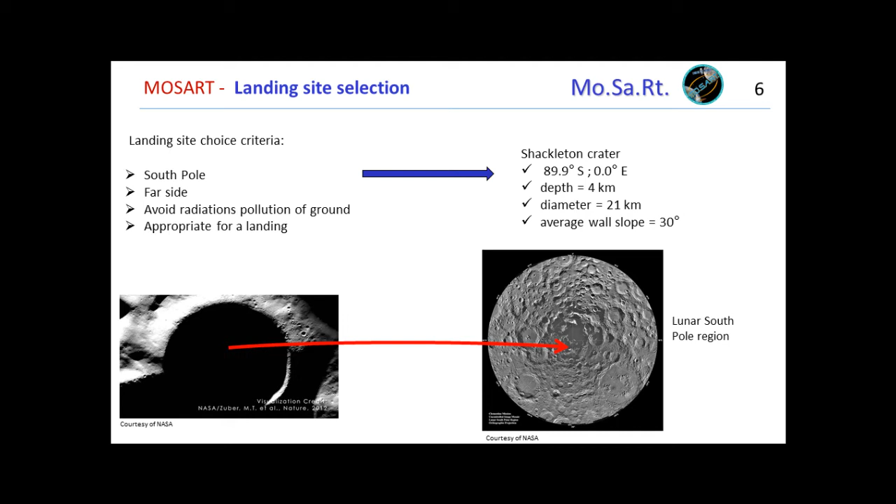These are some operations we considered in order to decide our mission architecture. We analyzed if it was better, after entering the crater, to jump out to reach a peak of light near Shackleton. We also analyzed whether to dock the sample before coming back to Earth or not, and whether to have a rover to explore more areas inside the crater. In the end we decided not to jump out, to dock, and not to have a rover, mainly because of mass issues. So our final architecture includes an orbiter, a lander, a re-entry vehicle composed of a service module and a re-entry capsule, and an ascent vehicle from the Moon. There's also the chaser, but that's not a separate vehicle — it's just the orbiter and the re-entry vehicle together, after docking.

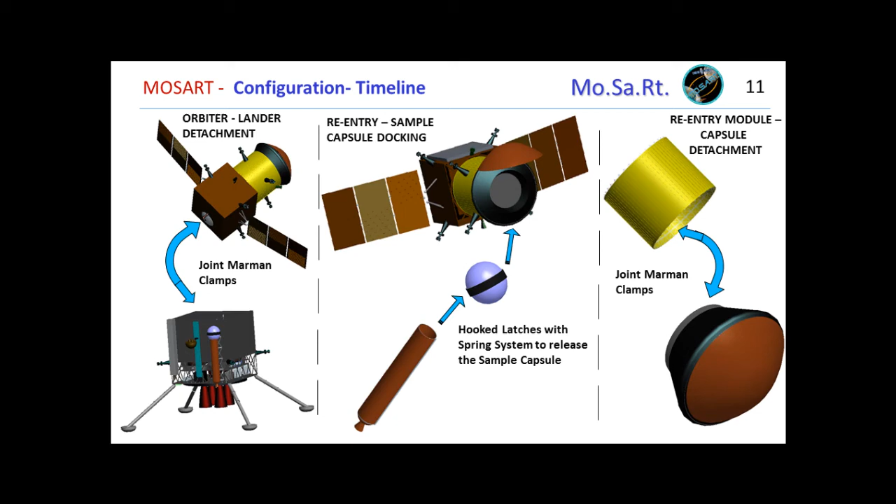The next few slides, I'll just go through each model configuration very briefly in order to understand the components contained within them and what were the different functionalities which allowed us to conceive this particular idea of the composite structure.

So this is the structure of the lander. We've got the face which is doing the drilling with the driller and the robotic arm, which allows the disk to contain the sample itself. Then we've got the top view. The main driver, I must mention, is the size of the propellant system within the tank, which is only used during the landing phase.

The volume contained within this and the mass requirements actually drove the dimensions of the entire lander itself. We also notice that there is a truss structure here, which allows to minimize the mass and be able to distribute the forces consistently during the worst conditions of launch dynamics. We've got the nozzles here, and finally also we should mention the lander rotation mechanism, which would be for later robotics, basically concerning the rotation of the lander with respect to the moon surface to allow better chance of the drilling.

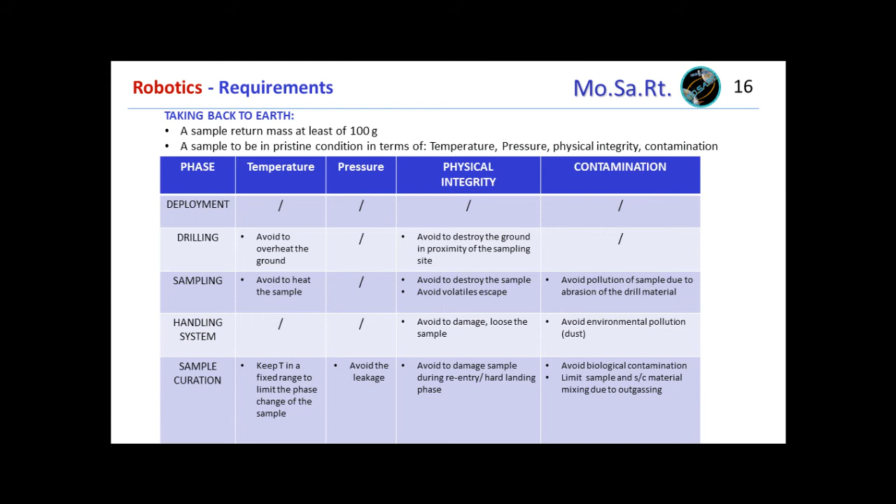During the sample curation, which regards all the re-entry phase, it is important to keep the temperature in a fixed range in order to limit the phase change of the sample and avoid or limit as much as possible the leakage. So here we have a video that shows the operations.

We can see that there are two drilling operations that are performed. For the first one, and then to make the second one, there is a rotation of the upper part of the lander with respect to the legs. The operation ends when the sphere is launched from the lunar surface.

For the drill, the main drivers that have been considered are the thermal problem, so as said before, not to overheat volatiles; the power required, so minimize the power; and also time, since the first launch window is less than 2 days after the landing on the moon.

So a single rod rotary drill with shutters has been designed. In this sketch we can see the bit in drilling mode and sampling mode. In sampling mode, the main bit is retracted. The drill rotates, and in this way the sample core is created, and at a certain height, a shutter mechanism detaches the sample from the ground.

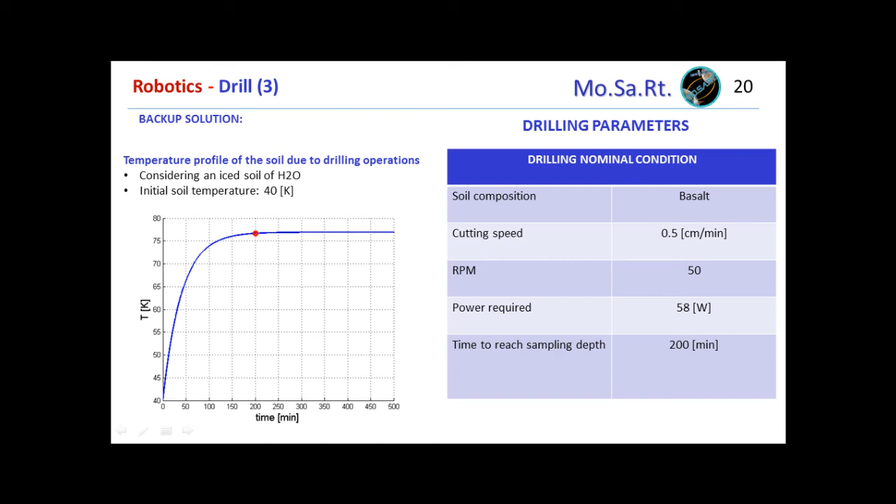Regarding the handling system, the drivers are the reliability of the system. In particular, we tried to have the simplest motion in order to minimize the degrees of freedom and limit the number of motions, minimizing the possibility of a failure. Also lunar dust is important, since we have to protect mechanical and electrical devices in order to avoid a jam of the system.

So a robotic arm with a plate fixed on it has been designed. The output of this design is in terms of geometry and mechanical properties. In this picture we can see that we have 3 degrees of freedom: a translational gear, and 2 rotations here and here along the azimuth axis. We have 2 arms, and on the second one we have the plate fixed. In this plate, which I'll show later, there is the sample container, and the drill delivers the sample into this plate.

The dimensions of the sample are: height of 10 centimeters and a diameter of 3 centimeters. The sample container is 12 centimeters in height and 3.5 centimeters in diameter.

Here is a sketch of the sealing mechanism of the sample container. Basically, the cap is pushed against the sample container, and due to an elastic deformation -- here is a section of a ring -- these harpoons attach to the sample container. I chose this solution with respect to other sealing mechanisms that use, for example, heating elements.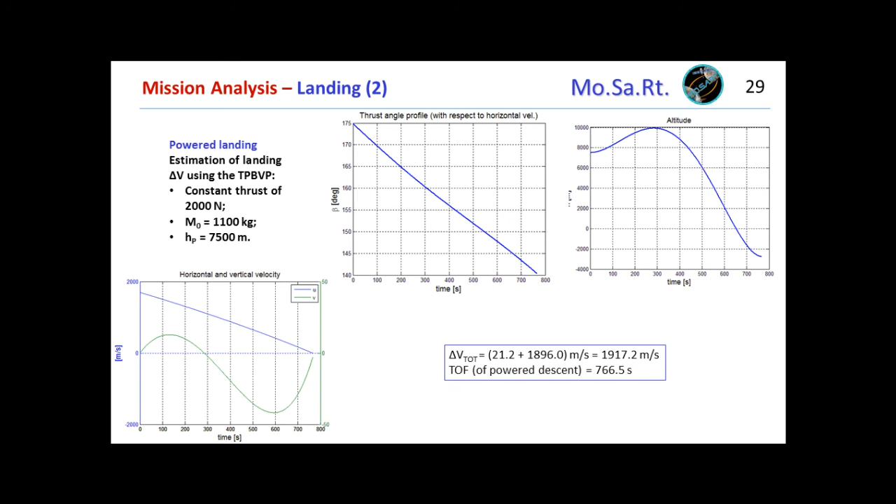You can see the thrust and the horizontal and vertical velocity for the power descending, and here for the altitude, the horizontal displacement.

After 1.43 days, we have to launch our sphere containing the rock sample. We use a rocket that will bring the sphere into an orbit at a height of 105 kilometers, above the one in which there is the orbiter and also the chaser.

The trajectory is divided into 4 phases: a vertical ascent, a coastal turnover, after which the rocket injects into orbit with apocenter tangent to the circular orbit, and here makes a final impulse.

You can see that the inclination and the node of this orbit is the same as the chaser one. The sphere mass is about 10 kilos, and the overall mass is 48 kilos. Now we have performed the rendezvous and docking.

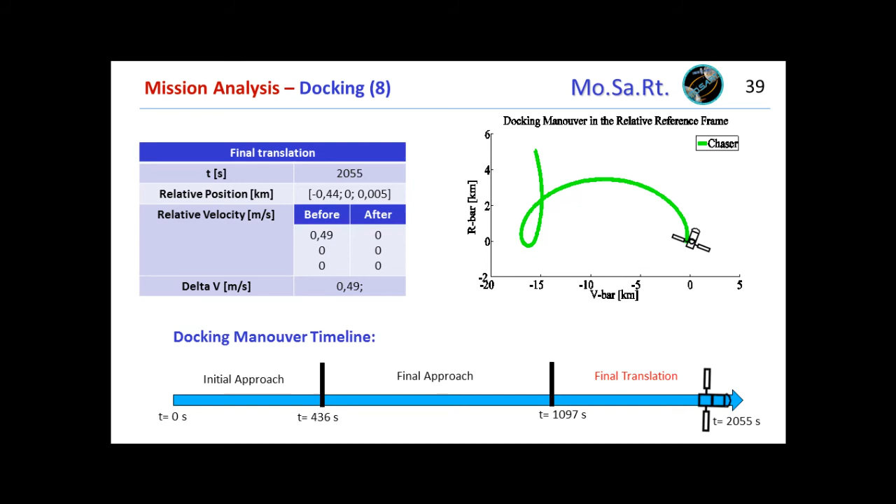This translation is made only by RCS and not with the main thruster, because the delta V required is low. So we can reach the sphere.

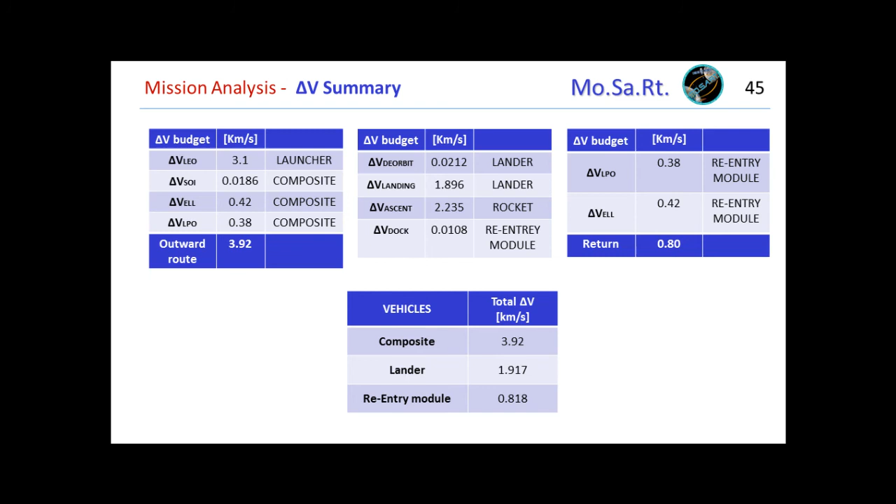And since we need to use an RTG, we can't use European launchers, and driven by satellite mass and C3 energy, we chose the Delta 4 Medium as a launcher.

Now Antonino Pinzotta will speak about propulsion.

Good morning. I want to present a brief overview of the propulsion system. I started from the general requirements, which are common for all the vehicles we have in the configuration, in the composite.

For the lander, we need also restartability and total impulse, while the orbiter needs only total impulse. The ascent vehicle needs a fine orbit injection and to work also at low temperatures, because if there is a leakage in the thermal system, we want to do the return anyway.

And the reentry module basically has the same sub-requirements as the lander system. To select the appropriate system for every vehicle, a parametric analysis related to mass and delta V is performed with the idea to reduce mass and also power, because power is demanding also for the mass budget.

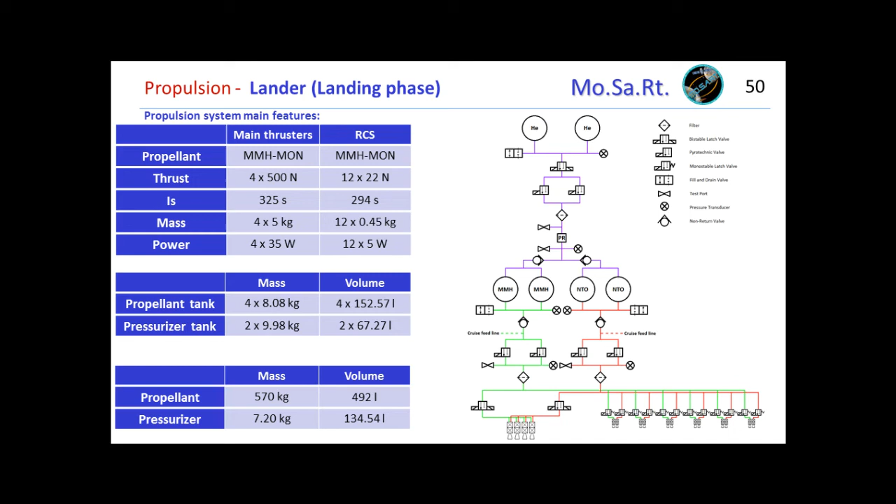The system selected for the TVC is cold gas, because it assures good precision during the emission phase and also during the steering. Then for other features, I want to exploit maybe a composite case in order to save mass, because the system is also small and it's easily built.

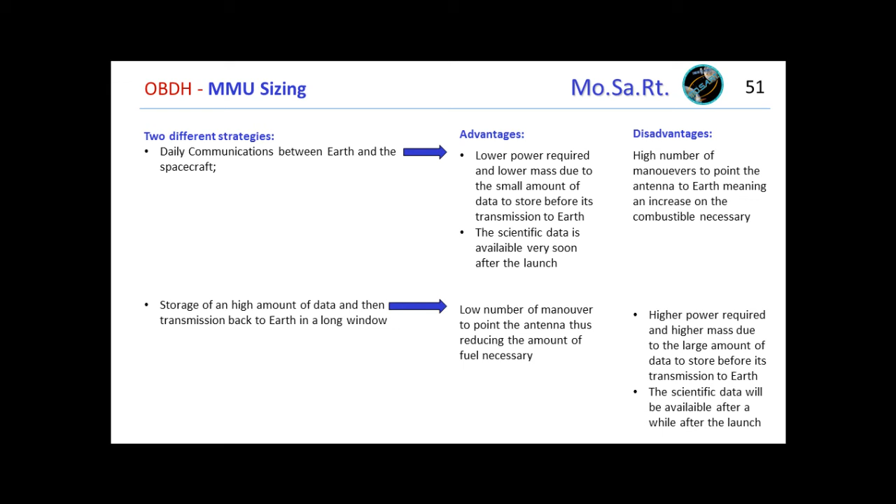The other strategy is opposite to the first one: accumulate a high amount of data and then download it every couple of weeks in a long window. This has the advantage that the number of maneuvers required will be low, so less fuel will be necessary. But the disadvantage is higher power and higher mass for the memory unit, and the scientific data will be available only after a while.

So the choice made was to have daily communication between the orbiter and the lander, since the antenna mounting, as we will say, doesn't require very high precision, so the maneuvers necessary are not so demanding. The data produced has been estimated, between scientific data and telemetry, at around 41 gigabytes per day. So we consider installing a 128 gigabyte memory in the lander, in order to take into account possible increases in the scientific data produced by the payload.

For the scientific payload, the communication frequency between orbiter and Earth has been chosen such that download happens on a weekly basis. The total data produced by the telemetry and received from the lander has been estimated at around 240 gigabytes per week, so a 1.2 terabyte memory has been installed, in order to have the possibility to install further scientific payload on the orbiter if possible.

For the docking and the landing, the two phases are very similar, because in both cases a high amount of data produced by the installed cameras must be analyzed, and then the capacity analyzed in the smallest amount of time possible, in order to give the control system the changes needed to perform the operation.

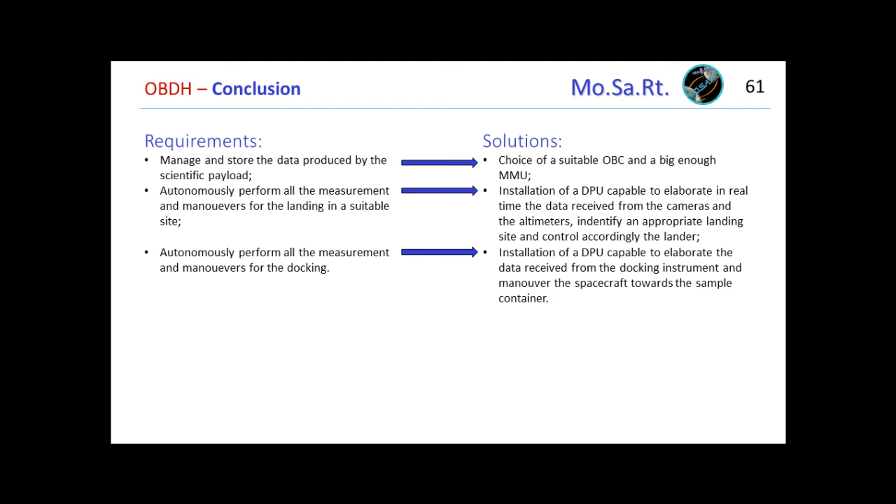To conclude, the requirements of storage and management of the data have been decided through the choice of an appropriate download strategy. And then for the docking and the landing, we chose to install a dedicated data processing unit.

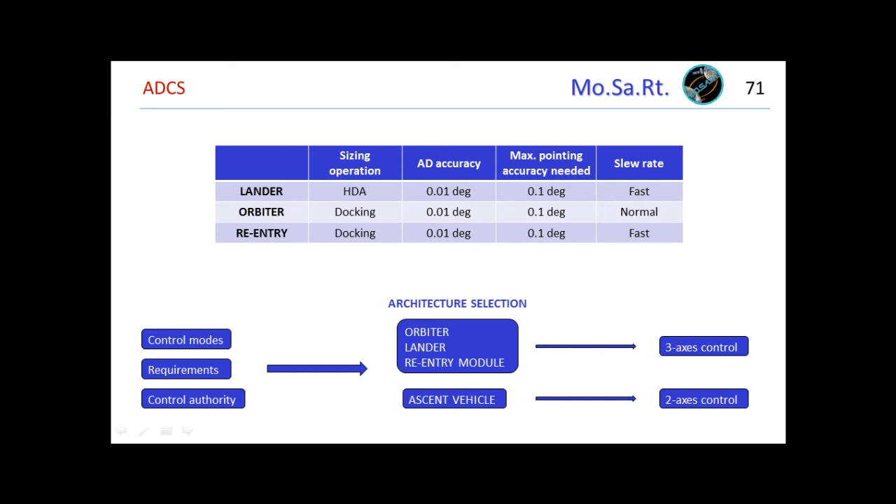For the lander, the sizing maneuver is the one to happen during the lever maneuver, and from mission analysis, that maneuver sizing would require making a 45 degree turn in less than 5 seconds. With the thrusters selected together with the propulsion colleague, we would have a performance below this limit. Moreover, the inertias have been estimated taking the wet mass of the lander, to be conservative in the sizing.

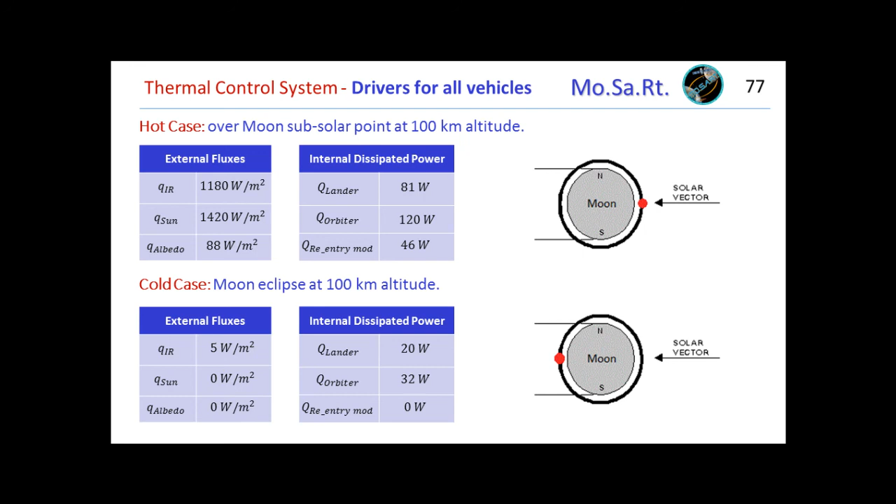Different designs were found as a solution for the three vehicles. For the lander, we make use of the waste heat coming from the MRTG, which produces 2,000 watts of waste thermal power. A part of it is exchanged with a hot plate, placed externally on the lander faces. Between the hot plate and the internal structure there is a switch that controls the flow, and then there is the delivery to all the internal components.

For the orbiter, it is mainly covered by the MLI in all faces, except for the zenith face, which is almost entirely covered by the louvre, that helps to control the heat rejected to the deep space.

The louvre must not point toward the moon on the day side, due to the high infrared of the moon, so it has been placed on the opposite side of the moon direction, at its zenith point. Anyway, it has been designed to resist statically 45 degrees of the sun radiation.

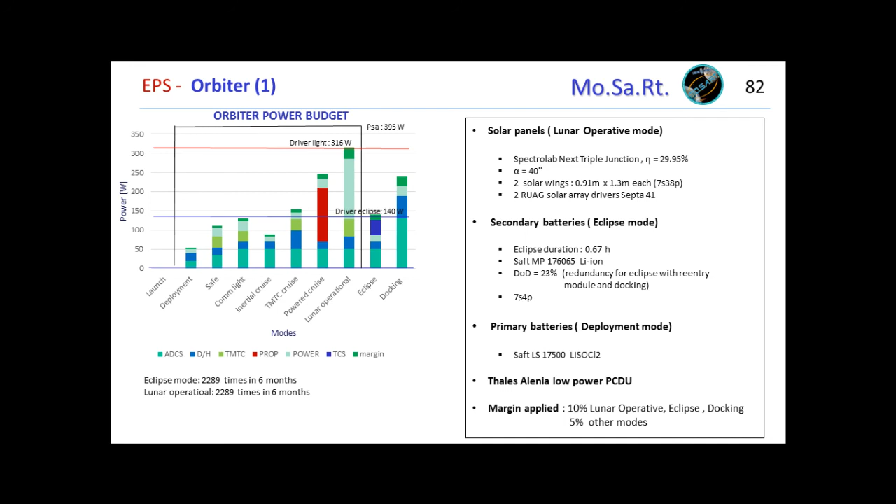For the secondary batteries, we considered one eclipse per orbit, so we have a low depth of discharge, which provides good redundancy in case of extra power demand. We also use a small package of primary batteries for the first phase, which is the deployment of the solar arrays, and we use a low power control unit.

The mass has been margined by 10% to arrive at 23 kilos, and the maximum power demand of the EPS, during the lunar operating phase, occurs because we must charge the secondary batteries, and for this reason it is very high, 159 watts, because we have not so much time in order to recharge them.

And for the lander, as we have already said, we exploit the MMRTG.

The mass budget here is very high, 53 kilos, because we have an MMRTG which is very massive, and the maximum power demand from the EPS is during the powered descent, because the power control unit's consumption is a function of the input power we must provide.

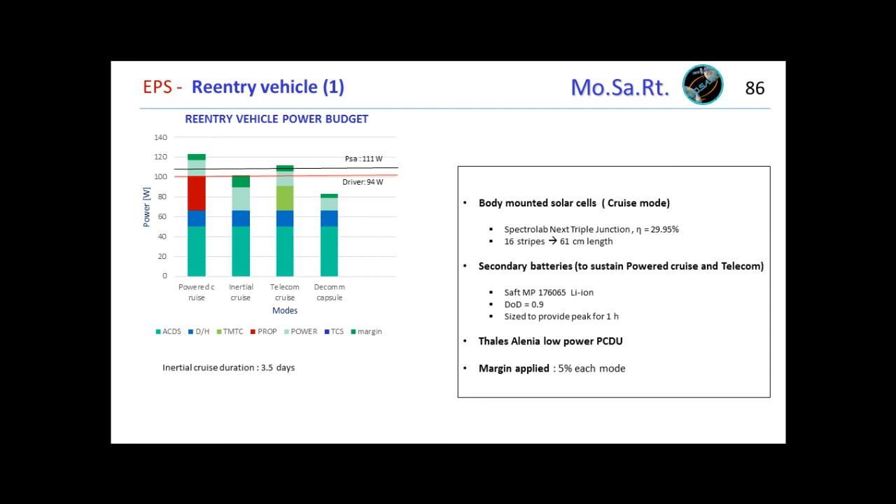We also need a small package of secondary batteries, lithium ion, always high energy density, in order to provide enough energy to sustain the peaks of the powered cruise and the communication phase of the re-entry vehicle. This phase lasts a few minutes, but to be robust, the batteries are sized to provide this extra power for 1 hour.

And now I leave the floor to Mohit with the structure.

Yeah, this is the final subsystem. I'll quickly run through the most important aspects. No intention to take over your lunchtime, so sorry about that.

The basic internal model of the truss structure, including margin, comes to approximately 200 kilos, about a 30% margin. We applied the Delta 4 adapter constraints to do the launch analysis, and the results were quite satisfying even though we considered a very pessimistic point of view.

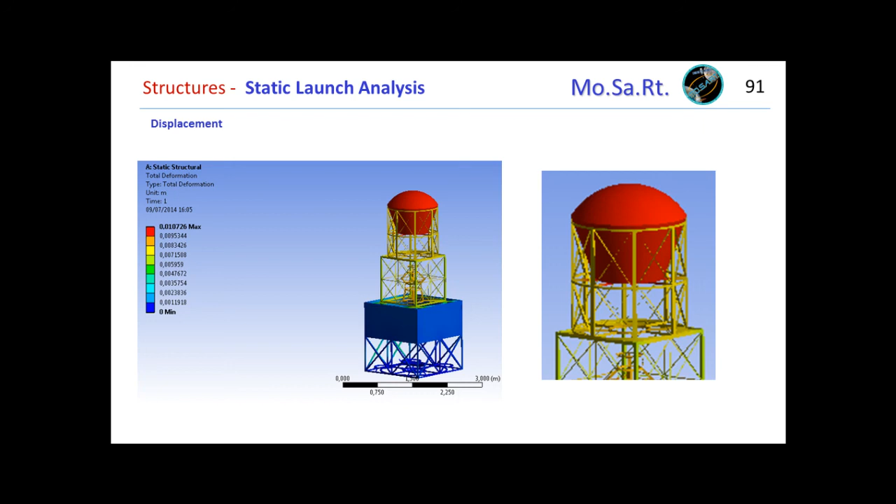The displacement is nothing to be worried about. Looking at the red big box on top, the maximum displacement is just over 1 centimeter, which is almost negligible compared to the 5 meters of the entire structure. We should keep in mind this is a local displacement while applying the pressures and loads for the launch, which is a pessimistic 6.5 G for our case.

Finally, for the equivalent von Mises stress, we've got about 230 megapascals of stress in our case. Again, most of it is concentrated in the orbiter and the interface between the orbiter and the lander. But the good thing is that for our case, with 7075 aluminium, the yield stress has a maximum limit of 560 megapascals.

So totally, with the 20% margin applied, we are around 2700 kilos. And since the launcher capability is around 4 tons, we can say that we stay quite within the limits. So this is fine.